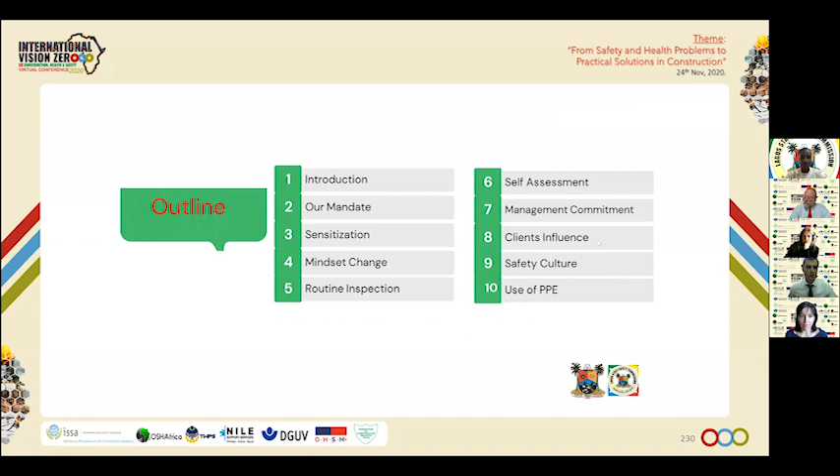Before I start, I'd like to give a brief introduction about the mandate of the Lagos State Safety Commission. The Commission was established in 2011 and has the mandate of being the policy formulating, advisory, and regulatory body for all matters relating to the safety of lives and properties. The Commission is also responsible for coordinating government ministries, departments, and parastatals, and as part of our core functions, we conduct investigations and make recommendations on policies relating to safety in the state.

What is our mandate? According to Section 9A of the Lagos State Safety Commission's law, part of our mandate includes policy formulation, advisory, and regulatory function for all government MDAs regarding the safety of lives and properties at all levels and all safety-related issues.

In the same law, Section 10E empowers the Commission to promote safety culture through sustained public and institutional enlightenment strategies and programs, which we carry out through a series of sensitization and advocacy initiatives.

So I'm going to start with sensitization. What do we mean by sensitization? The Lagos State Safety Commission has, over the years, made it its responsibility to bring safety awareness to artisans, builders, contractors, ensuring that every individual understands the part they play in ensuring the safety of lives and properties at work.

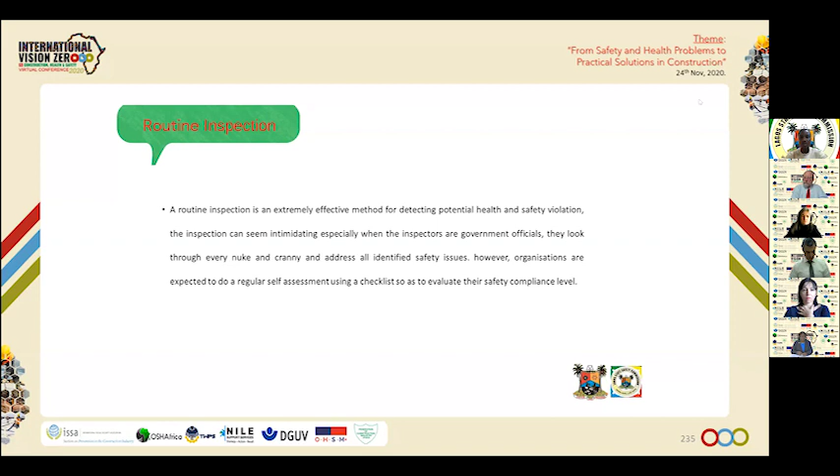This is one of the functions of the commission, and part of what we do is ensure that our list of consultants and officials go around various construction sites with pre-established checklists, ensuring compliance with certain safety measures to reduce accidents across construction sites in Lagos.

Self-assessment. The purpose of self-assessment is to promote and improve safety performance through the direct involvement of personnel in critical examination and improvement of their own work activities.

Our opinion is that it is important. Self-assessment is an important mechanism to ensure that management is effective in monitoring operational safety performance, and it takes time to ensure corrective actions are put in place to improve performance in their respective organizations.

Some of the advantages of self-assessment include recognizing and controlling hazards in your workplace, reducing accidents in the workplace, and reducing costs by being proactive instead of reactive.

We'll also be talking about management commitments, and this is another area where we see a lot of construction sites and contractors lacking, especially in Lagos.

Management commitment cannot be overemphasized. It is a specific and critical component to ensure the safety of workers, and that there's awareness in itself. It has a lot of benefits.

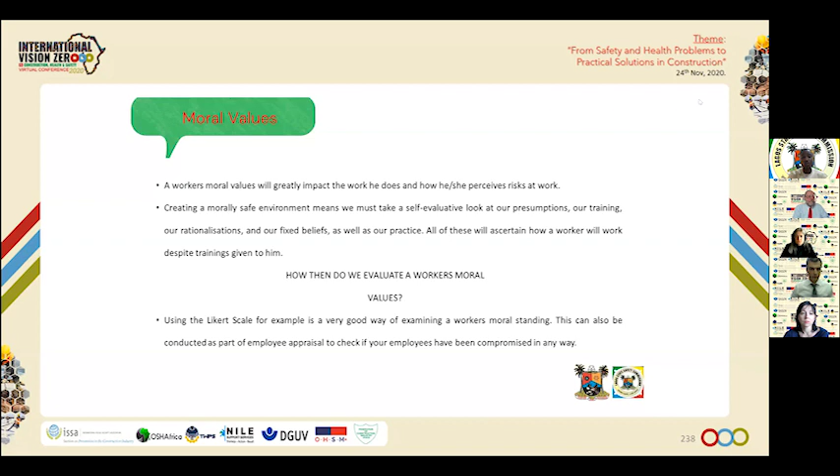This is important because a lot of artisans have various moral values. And until we analyze where these moral values lie alongside our organization's commitment to safety, there will always be a gap between establishing a proper safety protocol on our sites and enforcing it across the various sites.

A positive safety culture. A safety culture is an organizational culture that places a high level of importance on safety beliefs, values, and attitude. A positive safety culture can result in improved workplace health and safety and organizational performance.

The best way to enshrine a positive safety culture is, one, ask questions. Do workers know all the safety procedures and believe that they are important and necessary? Are workers, managers, and senior leaders willing to invest the needed time, money, or energy into achieving company safety objectives? Can workers, managers, and senior leaders freely communicate their concerns without fear? Do leaders have the time to educate, train, motivate, clarify, and remind workers on the company's safety goals?

Are your safety and productivity goals mutually beneficial? All these questions are important to ask for us to start establishing a positive safety culture.

Now, use of PPE. The use of PPE, as we all agree, is the last control measure and is a very crucial aspect in construction sites. PPE protects users against certain hazards, and this must never be overlooked. At major construction sites in the state, there has been an oversight on the use of PPEs, mainly because there are many independent construction workers and they may be difficult to supervise.

Greetings of the hour, everyone. I'm really humbled to be in the lineup with all the distinguished speakers for the 2020 International Vision Zero Conference. I'm Jackie Lwanga, and I'm the HSE manager for the East African Crude Oil Pipeline on the Ugandan side of the pipeline. I'd like to share some of the cultural challenges we face in the construction sector.

First and foremost, before you even think of the risks that come with the construction itself, I'd like us to go a step back and look at the risks we face at the time of clearing the site, ready for construction. My question to you is, what is on the site? What will you find on the land where you'd like to develop? You might find some ritual places or shrines, you might find graves. What is the legal framework when it comes to relocating these items? What are the cultural norms? What methodology do we use in the relocation? How do we manage the risks introduced by these processes, and what general considerations should you take into account?

So this is you with your big project about to start, and this is the site you've been allocated, and you find a shrine. It might be for a family, a clan, or a community, so moving it is not as simple as it may seem. It might look like you're out in the wilderness in a bush and you find a tree, but it's a tree of blessings where people go to conceive twins, get married, get finances, get all sorts of blessings. This could belong to a community, a tribe, a family, or a certain region. You don't just cut it and start your construction. There are guidelines you must follow, which introduce risks into our projects.

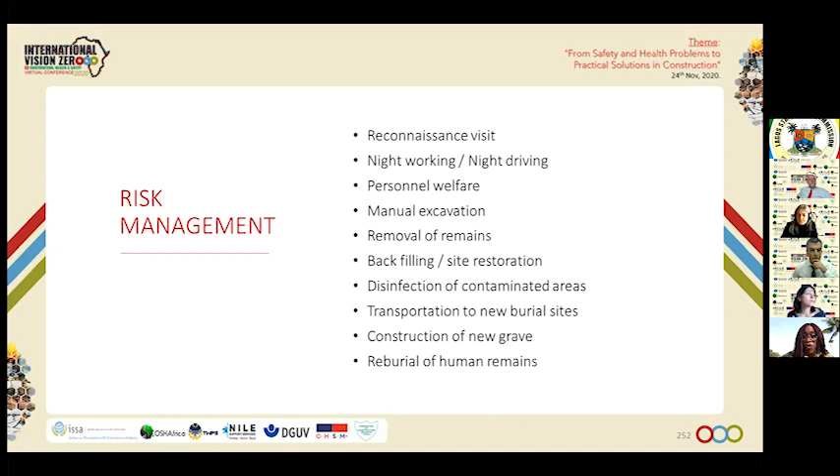So all these you've got to take into consideration. So your risk assessment before you go into the construction risk assessment should consider you relocating all these items that you may find on your site.

So what are some of the general considerations that you should have in mind? Take into consideration logistics - what equipment, what vehicles, what PPE do you need for these activities?

Many times you're not able even to complete one grave in one night. So how will you store the tools at the end of the working day? How will you disinfect the tools prior to storage? What chemicals will you use? Looking at the whole activities, your emergency plan...

Taking into consideration everything else that is happening, has to be really thorough, and you've got to practice it to make sure that should it happen, it will actually work for you. These activities normally attract loads of members from the public. How do you screen them from coming to your site and viewing what's going on?

Waste management is another very sensitive area when it comes to these activities. Sometimes they take the soil closest to the body and put it in first, then put the clean soil on top. But you have to check with the National Environment Management Authority to see if they agree with all this that you're doing.

So much as you may have top management commitment and support, identifying hazards in such scenarios - because it varies from one tribe to another, from one country to another - and also controlling the risks really, really varies.

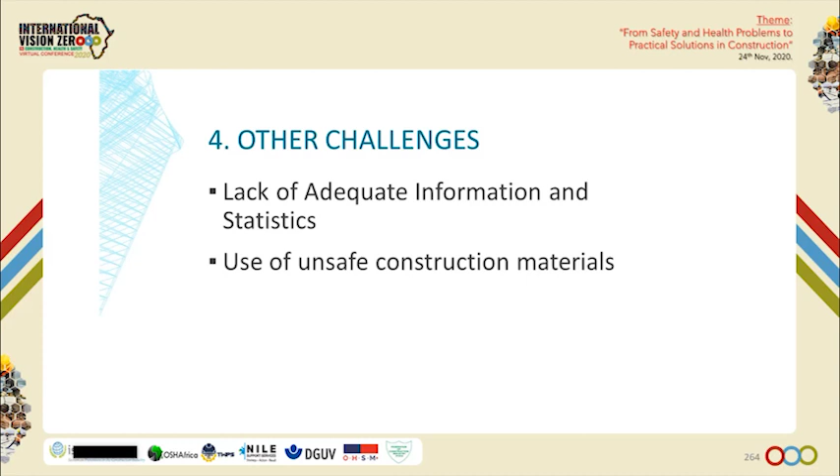Our recommendations, very quickly. We believe that there is need for more and greater advocacy with government. Without advocacy with government, many of these problems that we are seeing with the issue of governance will remain there. Yes, we are aware there are little areas of great work being done, like in Lagos State, but what happens to the rest of Nigeria? There's a lot of advocacy we need to do as a health and safety organization with our country. And there's need to create awareness amongst employers to let them realize that it is much more expensive to work in an unsafe environment compared to a relatively safer environment.

We need to educate our workers, and we must sponsor surveys to generate data. A lack of data remains one of our greatest problems in Nigeria. I thank you very much for listening. I'm sure the questions we posted on the WhatsApp group or on the question and answer group as recommended.

Thank you very much. Thank you so much, Madam. That was very insightful, and we enjoyed every moment we spent with you, and we hear you loud and clear. We heard the issue of unemployment that makes workers work no matter the condition they've been given. That's very loud and clear in your presentation. We heard the issue of data. Data keeps popping up in every presentation. But I think, all said and done, we need to start from where we are, no matter how little it is. The little information that we have in our workplaces on a daily basis, put them together, document them, that becomes data for us. Let's start documenting issues. Thank you so much. That was very, very insightful. We appreciate you. Thank you.

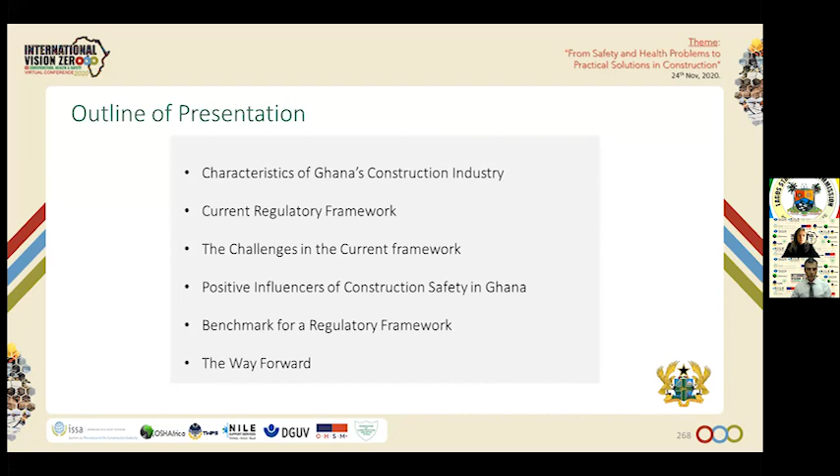I'll also look at the challenges that our current legal framework throws up onto us. Duty holders are not able to comply because there's what I call a legal uncertainty in the current framework. We'll also look at some of the influencers, those helping to drive change within the construction sector. We'll look at the benchmark we are aiming for moving forward and the way forward to getting there.

So without wasting time, this is a snapshot of our construction industry. It can be categorized under three subsectors: commercial and residential buildings, industrial infrastructure, and transport infrastructure. It plays a very significant role in nation building.

As a result, according to the Ghana Statistical Service, the construction sector contributed about 7.1% of GDP, back in 2018. It also employs a significant, reasonable proportion of the young population, according to the labor report published by the Ghana Statistical Service in 2015, which is the most recent data we have. It employs about 4.4% of the working population.

But what's interesting to note is that of this percentage, about 97% work in an informal sector. So the construction industry in Ghana is largely an informal economy. As a result, we have a lot of local artisans playing a role in the sector.

They are confronted with a lot of challenges, including lack of training. Workers within the sector are often trained through apprenticeship programs; beyond that point, there's no formal professional training given to them. According to studies by Diverse Empowerment in 2014, it identified a skill gap of about 60,000, projected to increase to 250,000 in terms of skills. So clearly there's a challenge in the industry.

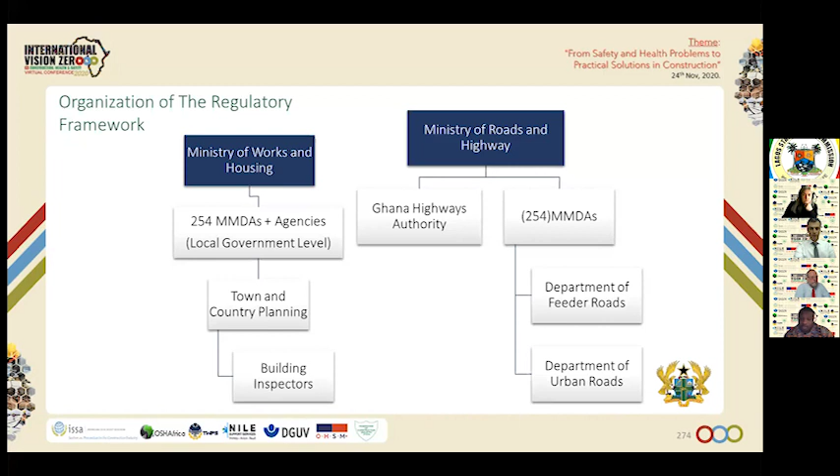With regards to road construction, we have the Ghana Highways Authority. We also have the district assemblies working through specific departments like the Department of Feeder Roads and the urban roads. So at a snapshot, you realize there are a lot of agencies involved when it comes to various health and safety concerns in the industry.

This slide gives a snapshot of how it has been framed. When it comes to fire safety, we have the Ghana National Fire Service. They have a specific regulation enacted into force, and they enforce compliance with that regulation, which is fire precaution. We also have environmental concerns championed by the environmental agency, enacted by an act of parliament enforcing a specific LI.

When it comes to development permits like building permits and any other permit you need to construct a building, that is championed by the Land Use and Spatial Planning Authority. So it goes on like that. These are some of the laws we have as far as construction in Ghana is concerned.

What is interesting to note is that there's no specific regulation on construction safety, unlike other jurisdictions like the UK, where they have a CDM regulation dedicated specifically for construction. We have local governance, land use and spatial planning acts, and these are all sort of decentralizing the role.

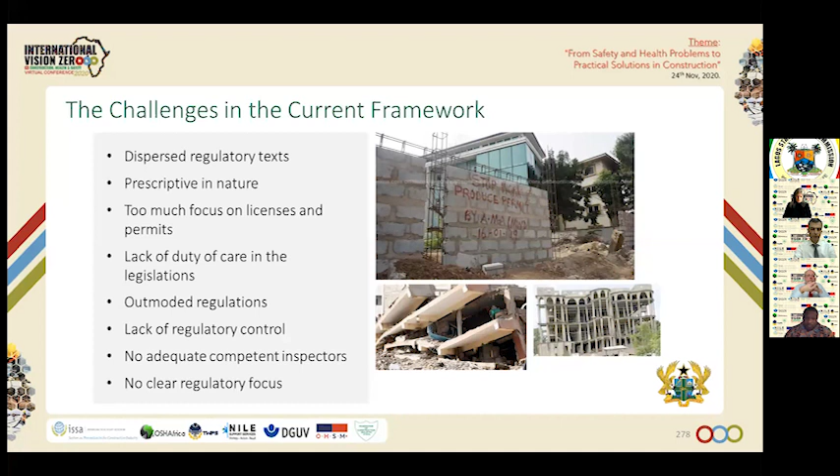So given the poor safety standard that we have and the organization of the legal framework, that makes it very difficult for us to ensure compliance.

We have certain external influences helping to bring about change. For example, the IFC performance standards, championed by the World Bank in collaboration with other financial institutions, provide donor support to most of the foreign multinationals embarking on construction projects in Ghana. You realize they are able to follow through with the EHS guideline of the IFC. This is quite common with foreign multinationals, especially in the oil and gas sector. On major onshore projects, you have the clients ensuring the use of the EHS guideline.

This is helping to drive change within the industry in terms of supply chain control, because once they are giving out contracts to subcontractors, they integrate EHS requirements in the contract, and they're able to influence down the supply chain what all the players in the construction project have to do. We also have the role of the media in a somewhat reactive approach, because they bring to the forefront what the incidents are.

Especially with the recent collapse of the building, it was the media that brought this to the attention of everybody, and this is sensitizing a lot of awareness and getting the pressure groups involved to continue to push for a reform in the industry. So definitely we have a benchmark that we are looking at.

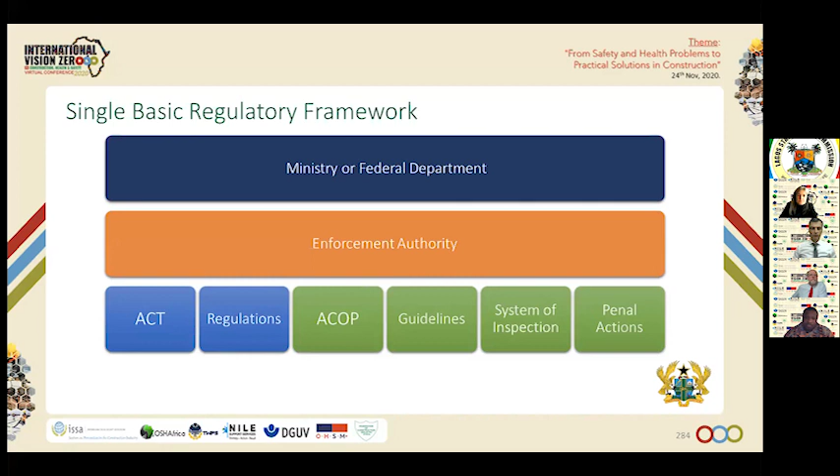Thanks. So for us in Ghana, we are looking at a single framework. We want to make sure that all the dispersed regulations are harmonized. We want to make sure that the regulations cover all health and safety risks. We also want to make sure that we follow the goal-setting principle, where we set regulations and expect that they follow best practice, and that resources are allocated to the various enforcement agencies.

If it's good for us, we will also have a system of data collection and analysis to bring about improvements in the sector. So before I end this presentation, I'll leave you with a quote from Todd Conklin, which states that safety is not the absence of accidents, but the presence of capacity. We need capacity in our national systems, our management systems, and our employees.

That's the end of my presentation. I'll stand by for any questions. Thank you.

Thank you so much, Selam. Thank you so much for a paper well put together. You agree with me that that was brilliant also. Thank you, that was really novel.

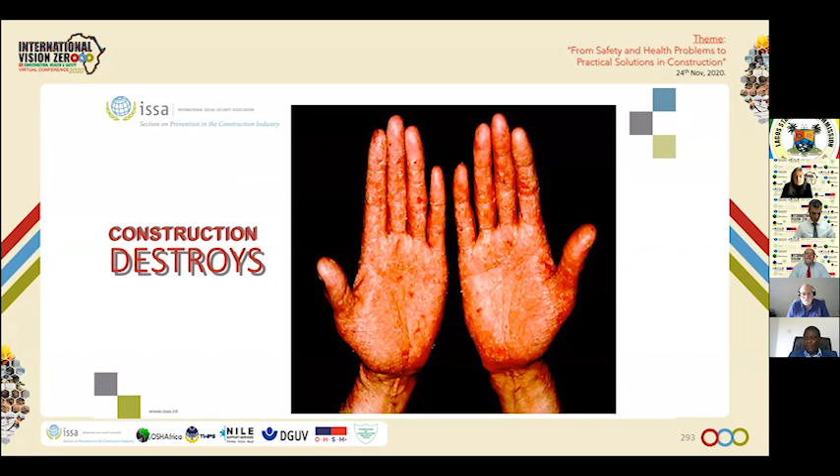Thank you very much for giving the opportunity to talk about fall protection measures in line with Vision Zero in construction. First of all, I would like to say construction is beautiful. I'm a civil engineer, so this is my first slide always. Construction is beautiful, I love construction, but construction destroys as well, and construction can hurt, and it could be fatal as well.

We heard a lot of facts today from different countries and from all over the world. I only want to highlight two facts. One is every 14 seconds, someone dies due to work conditions in this world. And fatal injuries due to falls are approximately 20% of all fatal injuries worldwide. This is a huge amount. If we talk about financial loss, the economic loss worldwide is 0.5% of GDP, that means 0.25 trillion US dollars related to fatal injuries from falls. This is something you should keep in mind all the time.

What are the general causes? We heard it this morning. If you look at accident causes in construction, these are the main accident causes, and slip, trip, and falls is number one. Ladders are also related to falls. We heard it again this morning.

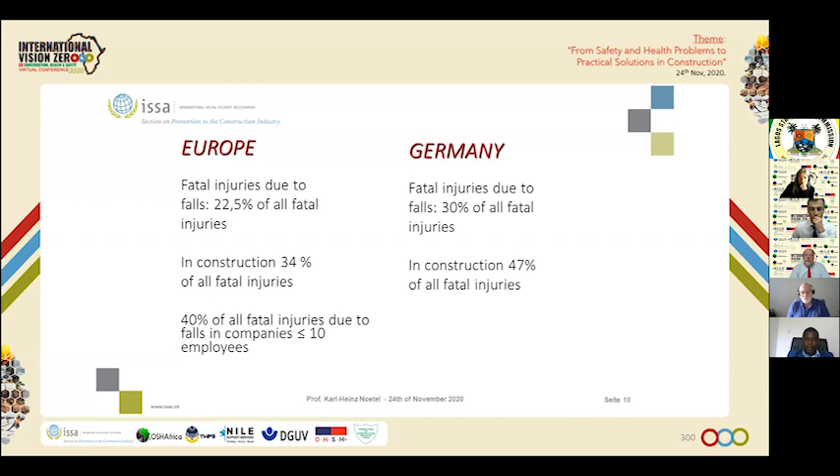Sorry, Professor Karl-Heinz, sorry, I have to interrupt you. You seem to be too far from your system, so people are finding it difficult to hear. Yes. Better now? That's better now. Thank you so much.

So, fatal accidents at unsecured stairs. As Ms. Stolofta already mentioned this morning, we still have this situation all over the world, and a lot of fatalities only because of that. We have a lot of technically excellent solutions for this, but we have to actually implement them.

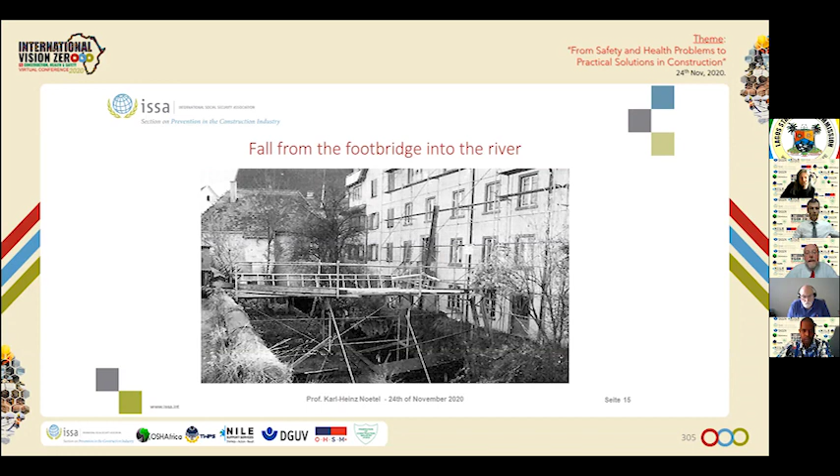There are devices available inside the building to use as an anchor point for your personal protective equipment. Or if you have a large cleaning job on a facade, you can use facade scaffolds.

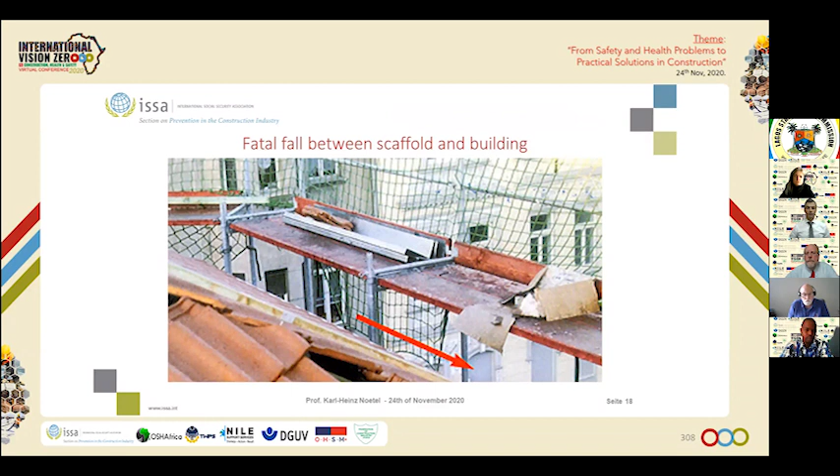Here, a fatal fall between scaffold and building. Seeing it from here, it looks quite good, but seeing it from the ground, you see the problem - it was a big gap between the scaffold and the building. Or another fatal fall between the building and the scaffold: here you have a facade scaffold, but the distance between the building and the scaffold is too much. It should be not more than 30 centimeters. Here we had a fatality as well.

So we have to ask ourselves, why do we tend to repeat some of our mistakes from the past, or similar ones? You heard this morning from Paul Defil that the first regulation to prevent falls is more than 2,500 years old - it was in the fifth book of Moses in the Bible. We have a lot of religions in this world, and if you really look at the holy books, you will find in nearly all of them some requirements. So we've been talking about it for thousands of years, but nothing changed, or let's say nearly nothing changed. We still have this huge amount of falls and fatalities related to falls.

For me, one of the main reasons is we have no safety culture. We have countries where safety culture is an issue - for example, the northern states in Europe have a good safety culture, and other states are working on it, but we have to look at this. Then we have to ask ourselves, are we using the right methods to change this situation? I have to say we have a good method, and it's called Vision Zero. And remember, the fatality rate in construction is around 2.5 times higher than in other industries.

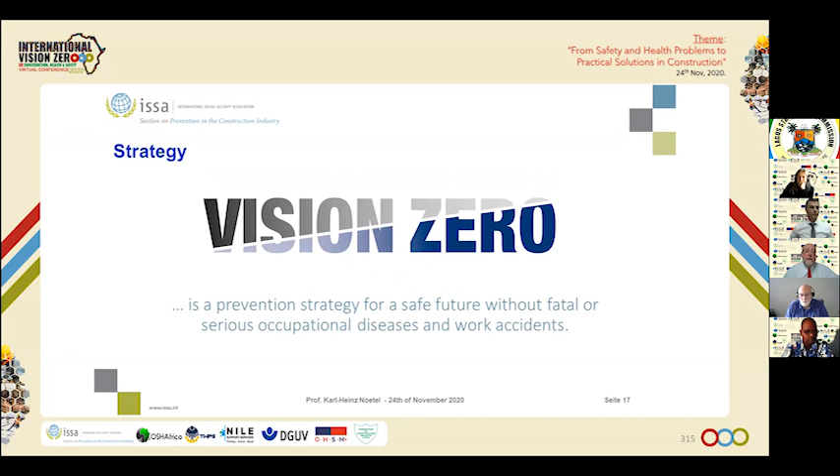For me, it's already a movement in this world because more than 100 states in this world are working on that, and every month it's getting more and more states following this idea, Vision Zero, this movement. And this is a prevention strategy for a safe future without fatal or serious occupational diseases and work accidents.

And we heard it this morning, illusion or mission possible. For me and for the lady this morning, yes, it is possible. Yes, we can do. You know that sentence from USA.

We have the 7 golden rules, and I don't want to repeat the rules in detail, but I want to show you how can we implement fall protection measures in these 7 golden rules. So the first one, take leadership commitment.

Paul said this morning, on every agenda, first item should be safety and health. And please believe me, I know some companies doing it, a lot of companies doing it. Only this, it costs you nothing. But if you put safety and health always on the first item on every agenda, I want to highlight it, every agenda, you will see everything will change in your company.

And for example, set an example in respect to occupational safety and health. Maybe you will talk to your managers and to your staff: this year, we want to have 50% less falls. So then you should discuss how can we do it. It is a leadership commitment to work on that and to put pressure on the managers, especially the managers.

Instantly react to unsafe conditions and behavior. Don't say, oh, the ladder is maybe a little bit too short, or it's not the correct ladder, but continue. No, stop and change. And then people will get the feeling, wow, health and safety is important. Our managers, our leaders, they are taking care of us and they want a change.

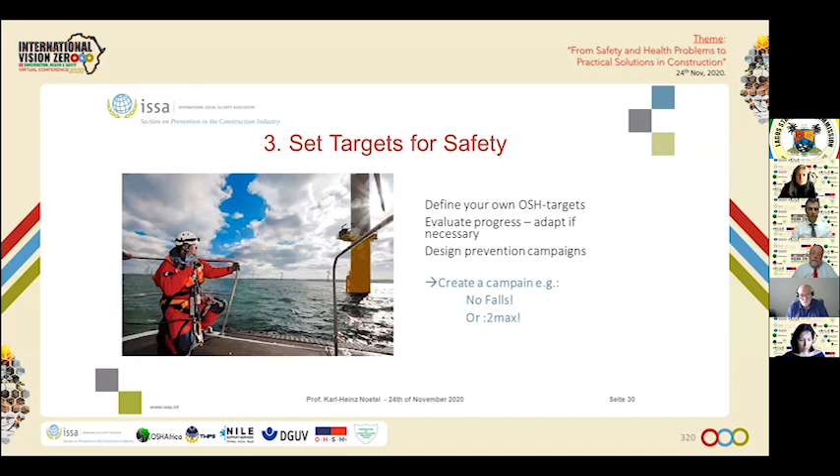Ensure a safe system.

Make your managers responsible. Here I'm saying any severe incident should immediately be personally reported to the CEO. In this time, it would be online; in future, maybe personally, direct. I know a construction company in Belgium that started this some years ago. The CEO said every fatal accident, every fall, or every severe accident, the manager has to come to me immediately. This clear message changed a lot, because now the managers felt responsible. They have to come to the CEO and argue why it happened and who is responsible. So this could be one part of it.

Implement a safety management system. Big companies already have management systems, and small ones have also started to create them. Implement clear safety measures to prevent slip, trip, and falls. There are technical solutions, a routine for how to evaluate the risk, how to manage the solution to prevent the risk, and so on.

The last one here is encouraging owner-client involvement, a very, very difficult issue. Try to convince the owner and the client that any slip, trip, and fall accident will extend the time for the construction phase. If there is a severe accident or a fatality, the construction will stop, because enforcement organizations will come, state representatives will come, maybe police and so on. So it is a stop for the construction site. Therefore, to prevent this, they should support any additional safety measure.

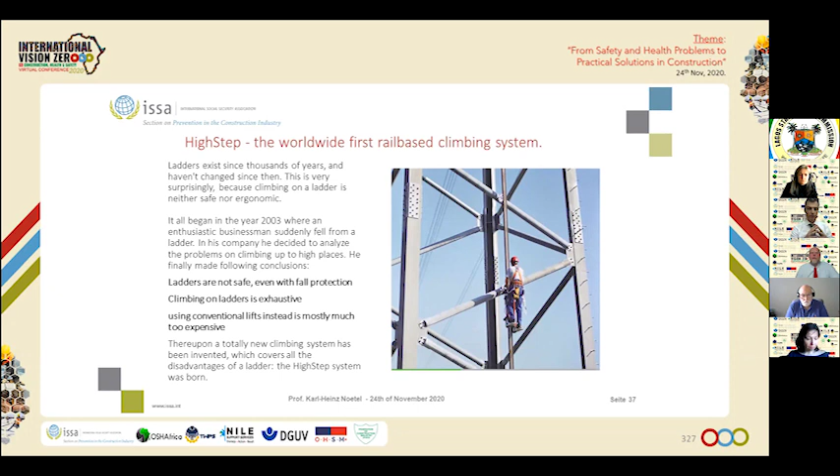A few innovations to show you. High Step, the worldwide first rail-based climbing system. This was invented by a guy who used ladders, but then realized ladders are not safe. Even with fall protection, climbing on ladders is exhausting. Using conventional lifts instead is mostly much too expensive. So he invented this climbing system, which covers all the disadvantages of a ladder. The High Step system was born. If you want more information about it, you can search online for the High Step system.

Or here, very simple, covering previous skylights. Very often we have these accidents. You make this kind of bridge made of steel, which is simple to do, and you are protected for inspections or other things you have to do there.

Or a fall arrest system for scaffold works. We have this developed in Europe, and there are many, many other systems. You saw it this morning also in the presentation of Mrs. Stolofta. But we have to take care of these erectors of scaffolds, because you can't build a scaffold to secure the scaffold workers. So we have a lot of technical devices to do it.

One thing: we have many, many languages all over the world, and I said it this morning in the inauguration. We need pictures without language, and therefore we make drawings of bad examples next to good ones. No written language, so it can be used worldwide. It is open source, everyone can use it. And we have 43 scenarios in the construction section.

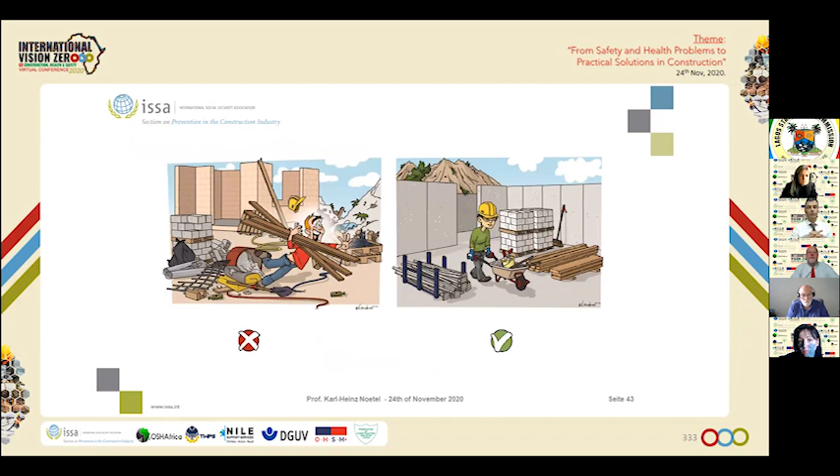I will give you some examples for slip, trip, and falls. Left side, wrong. Right side, right. A wonderful picture we saw this morning from Mrs. Stolofta, it was the same situation in real life. Here, we don't need any explanation, everyone can understand. Apologies, Professor.

Just a minute to go. Yeah, okay, I will speed up.

So here you have good and bad. I think everyone can understand.

You can use it also in your brochures, in the construction, in your company. This is prevention through pictures. Go to the ILO website or to the website of ISSA Construction, you will find it.

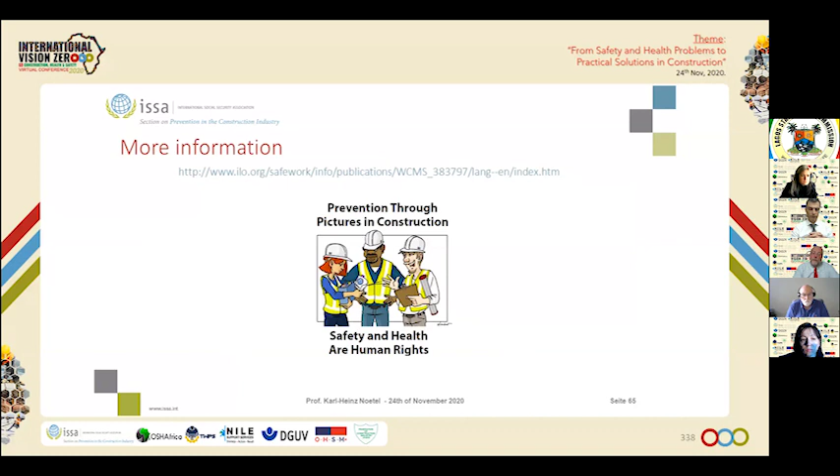Normally this is fatal, but the person survived, and he gave me the right to show it and to motivate people. We are not talking about theory, we are talking about practice. It happened. Therefore, I hope it is a kick-off for you to think more about preventing falls, maybe to change systems in your company. I would like to say thank you for your attention, and I hope I could give you some motivation. Thank you very much.

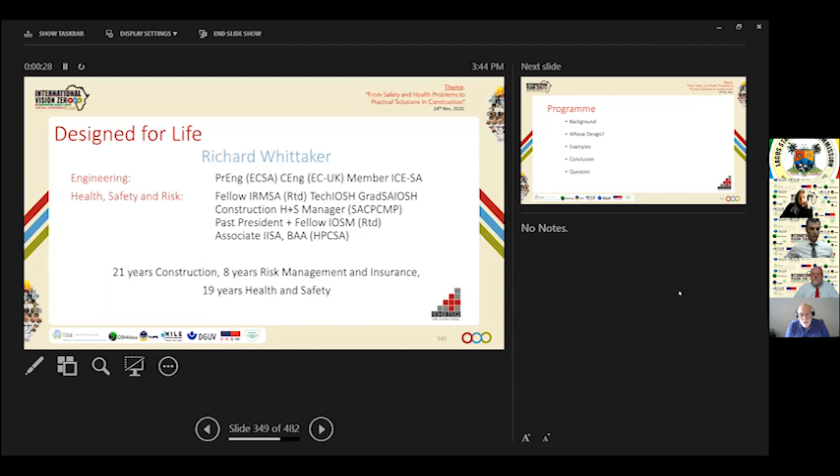Some time ago, as you can see from my front slide, I moved from construction as a civil engineer into health and safety, and it's become something very close to my heart, I must admit. I'd like to talk about the background, particularly in South Africa, to the issue around safe design, then talk about whose design it is, give you some examples of what we had recently in South Africa. After conclusion I will have one question for you, so please pay attention, there'll be points awarded.

Prior to 2003, there was no legislation specific to construction works, but we did have the building works within the general safety regulations. That had 12 regulations that covered issues that could be considered those of construction. When the construction regulations eventually came out, there were 28 different regulations, so obviously a much more focused document.

So the whole background to this is that there have been numerous incidents of structural failure of both permanent and temporary works, and people tend to overlook temporary works quite a bit, as we'll see in my presentation. These led to avoidable deaths and injuries, and it was all triggered by what I like to call the final straw.

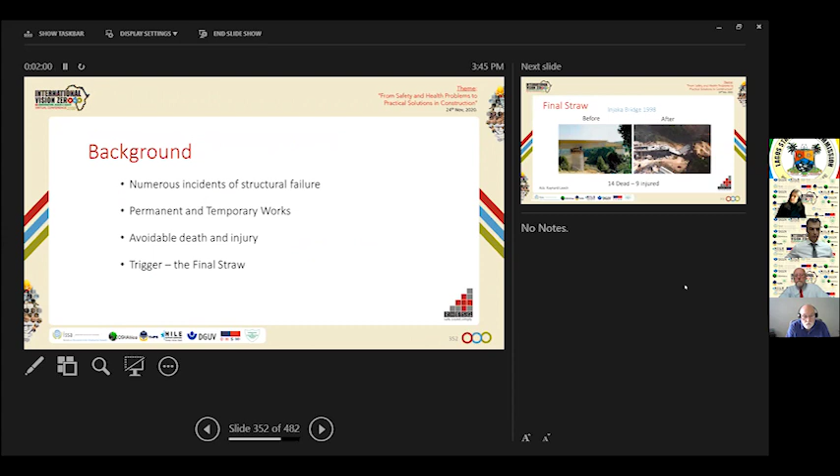In 1998, the Injaka Bridge was being built using incremental launching. For those who don't know what that is, the piece of bridge that would normally span between two columns is built on solid ground and then jacked out over the bearings of the columns. There's a leading edge, and you can see a steel structure in front which picks up the landing on the next column.

Something went wrong, and among the issues were insufficient reinforcement, incorrect placing of bearings, and incorrect interpretation of problems that arose. As you can see, the last straw was that it broke the bridge's back, and we killed 14 people there, with 9 injured.

The investigation went on for a long time, and it was 2002 before the results came out. The inspector of labour pointed his finger at the consulting engineers, who didn't have any independent design reviews for the contract. The appointed bridge engineer had insufficient experience in incrementally launched bridges, and that engineer died during the accident.

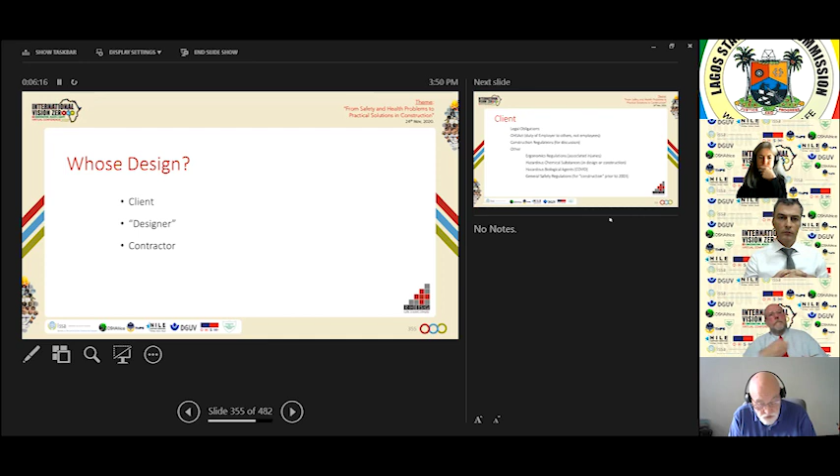And do they consider the health and safety specification? And then, is it built in terms of the drawing or the specification, or is our material substandard, left out?

And then of course we must look at temporary works, which are the contractor's responsibility. And even not just in construction, but also in demolition, we need some sort of designer's input as well.

So in terms of the client who has legal obligations in view of the OHS Act, with a duty of the employer to others, not necessarily employees, and the construction regulations, which I'm going to discuss shortly, there are other obligations too. The ergonomic regulations look at associated injuries with building and or maintaining the structure.

Hazardous chemical substances being used in the design and the material design or in construction. The hazardous biological agents, and right now COVID's in the forefront of our minds. And then the general safety regulations, which, as I said, were used for construction prior to 2003.

So looking at those responsibilities of the client in a little bit more detail, I'm not going to go through them one by one, but there is quite a comprehensive list of duties. Perhaps you should look at equating them to those required by legislation in your mother countries.

One has to ask, are clients aware of these responsibilities? Or do they just ignore them? They could not know about them out of innocence, but they could know about them and just ignore them.

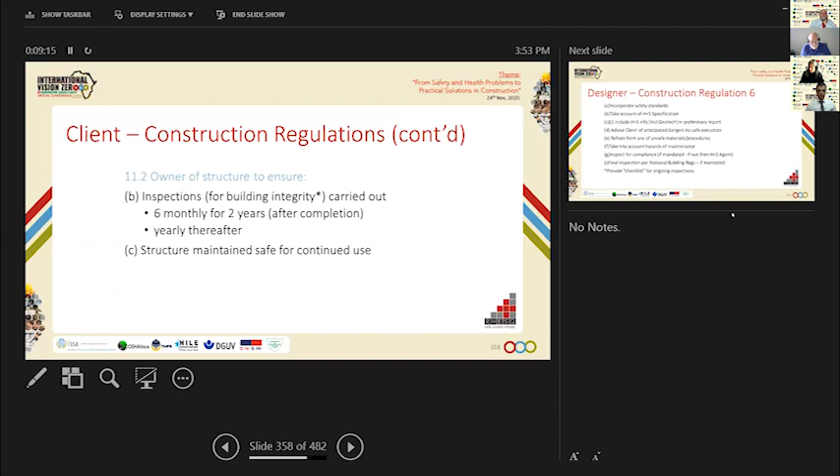Whenever it was built, it should have a yearly inspection, and the client must ensure the building is maintained safe for continued use. The designer has a long list of duties, and if the client hasn't produced a health and safety specification, why isn't the designer asking for it so he can do his duties?

The designer must incorporate safety standards listed in the OHS Act and regulations. This must include health and safety info such as geotech data, advise the client of anticipated dangers for safe execution of the works, and take into account hazards of maintenance.

At the end of the job, it should be inspected for compliance by the designer, and if the designer isn't mandated for that, the health and safety agent appointed by the client should do that work. There should be a final inspection as required by national building regulations. The designer should provide a checklist for ongoing inspections at 6 monthly and yearly intervals - otherwise how will the client know what to inspect?

As far as the contractor is concerned, I'm looking specifically at the temporary works designer. The temporary works design should include all anticipated loads, including those imposed by temporary works, such as reinforcing being stacked in the slab while waiting to fix the next slab up. That temporary works design must be aligned to the structural design drawings.

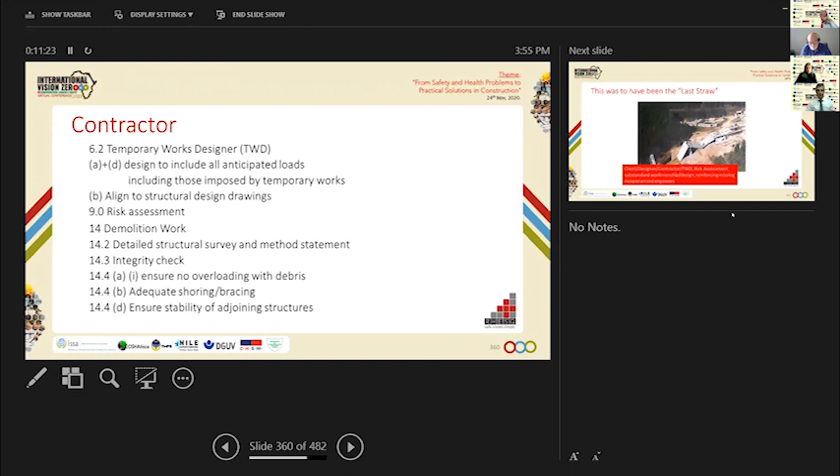The Injaka Bridge was to have been the last straw. In that case we looked at the client, the design, the contractor, temporary works design - risk assessment wasn't there, substandard workmanship or design, reinforcing missing, inexperienced engineers.

The construction regulation of 2003 - I've used that because most of the examples I give relate to prior to 2003 or prior to 2014 when the second one came out. The application is universal for all construction work, and a lot of people miss this: you don't need a health and safety specification under specific conditions.

There doesn't have to be a principal contractor's health and safety plan, nor does the subcontractor need one, where construction work was greater than 50% complete at the 18th of July 2003 when the regulations were promulgated. But all other regulations in the 2003 version were applicable irrespective of construction status.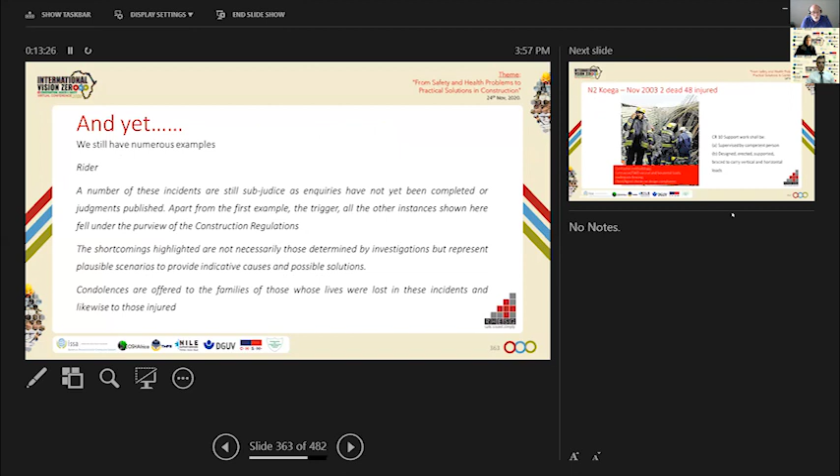On the N2 National Road at Koega, near Port Elizabeth on the south coast of South Africa, this incident happened just 4 months after the 2003 construction regulations were published, which in itself should have provided additional health and safety focus, but alas, not so.

Typically, since this isn't an isolated incident, this would have been caused by concrete dumped in one location and then vibrated to another, creating an initial temporary high point loading and inducing lateral loading on the substructure as the concrete was vibrated across. It could also be that the false work was not designed per se - it could be using standard units assumed to work, and doubtless there was a great shortage of horizontal and diagonal bracing to stop horizontal movement. The combination of these effects caused the whole structure to collapse in this fashion.

So again, it comes down to contractor's methodology, temporary works design, and the client agent checks on design compliance.

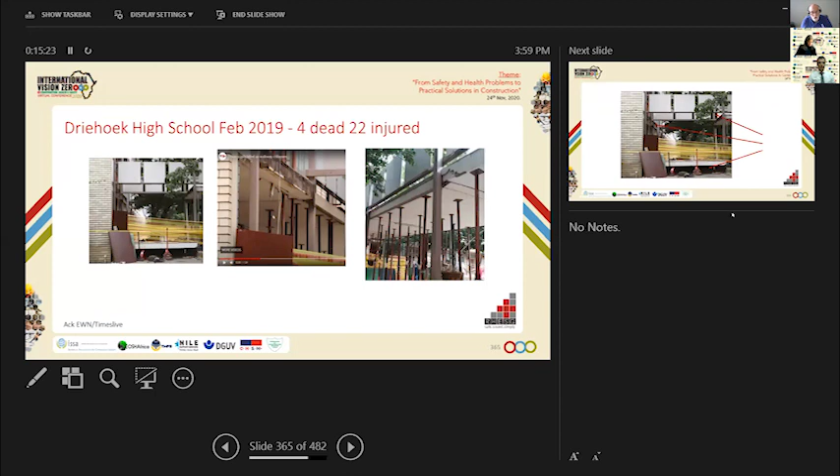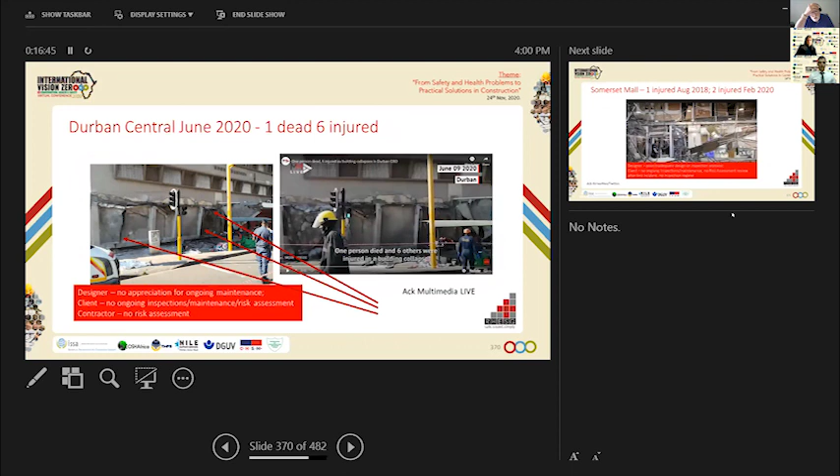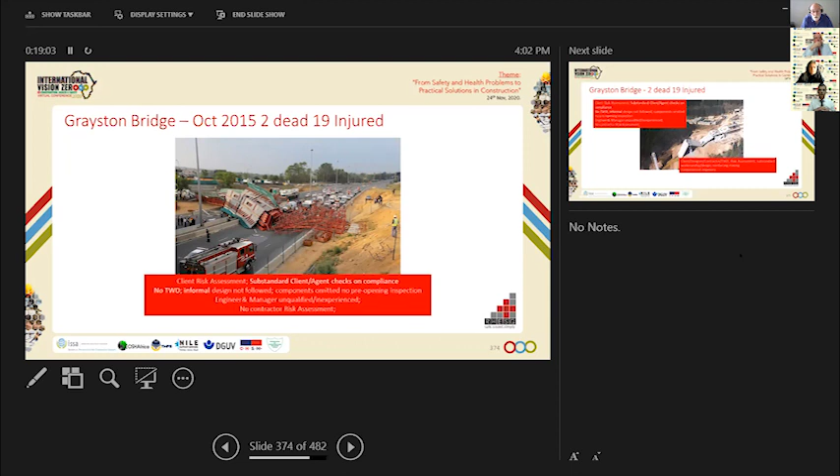There, we're looking at exactly the same thing 20 years previously. Exactly the same problem. The people doing the work weren't doing their work properly, and the people designing it weren't qualified to design it.

So, look at legislation and look at compliance. I looked at enforcement. How do we do it? The legislation is pretty good. It's taken a while to get it right, but it's pretty good. People seem to ignore it. So how do we enforce compliance? And why don't we enforce it?

Again, it's the usual story of safety costs money. Well, I bet those last two jobs cost a lot more than a bit of safety. So we look at just common sense. And as Winston Churchill said, those that fail to learn from history are doomed to repeat it.

When I say designed for life, do I mean the life of the building, or whose life? Thank you.

Thank you very much for the great presentation. It's quite exciting, but I think the key issue brings us to the attention of paying particular attention even to all these past incidences and occurrences that you've mentioned. I like your concluding remark from Winston Churchill that those that fail to learn from history are doomed to repeat it. I think those are strong words as we move within the paradigm of occupational safety and health. All these happenings in the past must be able to guide and direct us as we move into the future, as we continuously improve the practice of occupational safety and health.

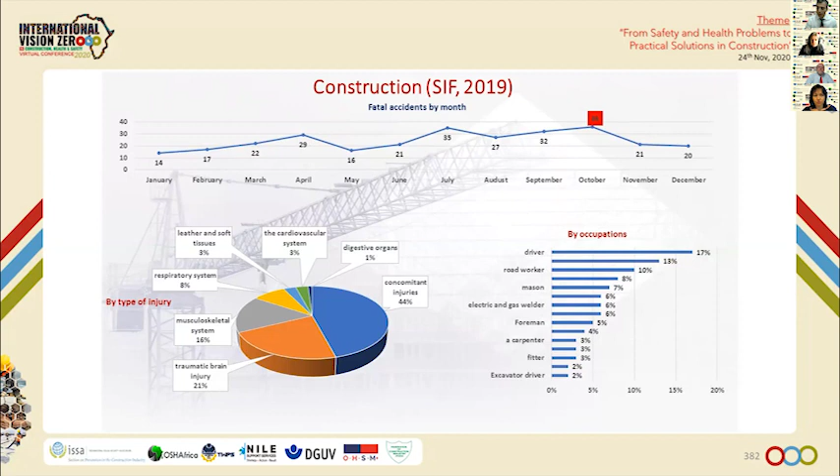A few years ago, we made a research among construction companies. We proposed a tool for running diagnostics of the maturity level of safety culture in a company. We created a list of factors that seem important and divided all the respondents, all the personnel in the construction company, into 4 groups: top managers, supervisors, occupational safety professionals, and workers.

The idea behind that method was to capture differences in respondents' opinions on what factors are more important or less important for creating a culture of safety. The respondents were asked whether a specific factor is important for preventing accidents on a construction site.

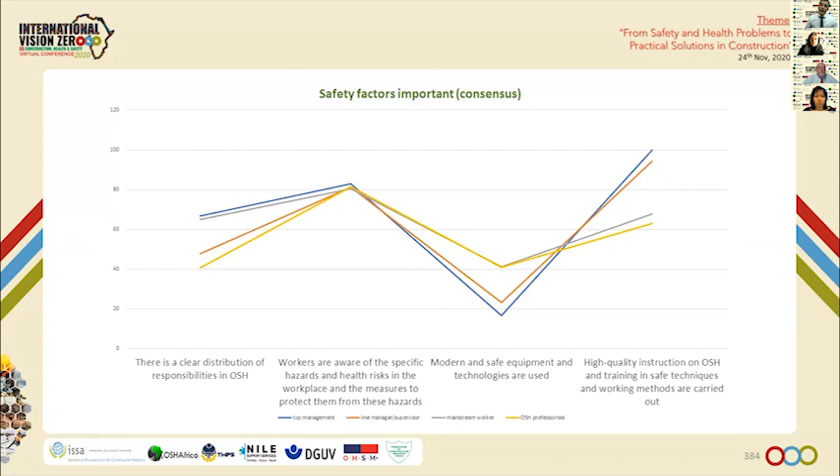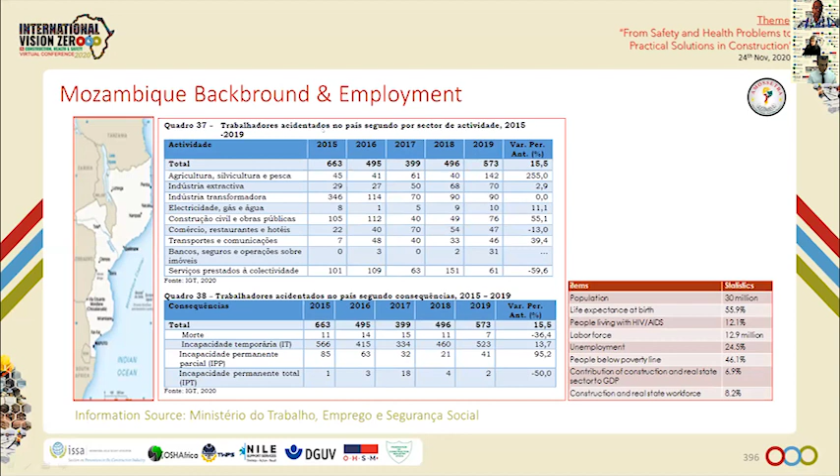And I'm going now to talk about the major construction accidents in Mozambique, which is not different from the other accident types which were presented here. We talk about vehicle and equipment related accidents, fall from height, falling objects, electrocution, being trapped, or in contact with hazardous substances.

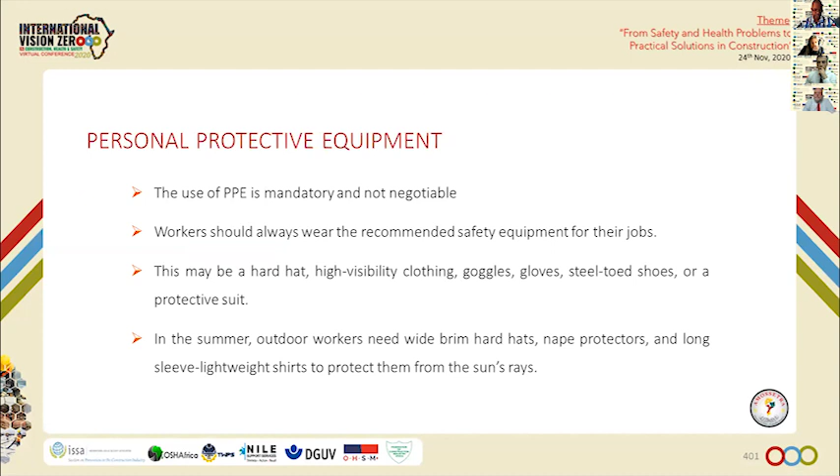I see also housekeeping as one of the prevention methods. If you keep your workplace clean or free from any debris, this can reduce the probability of having injuries. If you don't clean your site or organize your site, there is a chance of having trippings, falls and slips due to these unorganized sites.

So employees should store their equipment and materials when they are finished with the work. Some employees think they have no time, or according to what I've witnessed in Mozambique, supervisors usually do not give time for employees to organize their tools and materials at the end of the work activity. So it's important that employers, in the person of the director or the most senior person in the company, enforce the need of having the site in good working conditions.

Mr. Valeri, our time is up.

Okay, equipment and tool maintenance. Before using any piece of equipment or machinery, workers should ensure that proper working order is in place. So workers should be taught how to use the equipment and how to keep it safe.

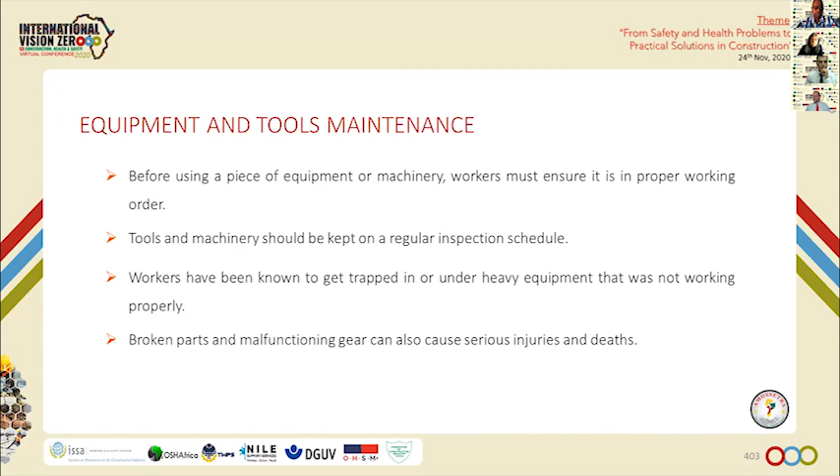Prevention of falls. Most of the accidents in construction, as I said in the graph, is related to falling from heights and also collapsing of scaffolding. So there are two types of accidents that are most killing in Africa. In Mozambique it's also falling from heights, collapsing of scaffolding, and also vehicle-related accidents.

So I will go straight to the commitment of the Mozambican government through occupational health and safety. To show this commitment, Article 8 of the Constitution of Mozambique talks about the obligation of providing good working conditions to employees. The Labor Law, Chapter 6, Articles 216 to 236, also talks about health and safety requirements. The last ratified conventions in Mozambique were the Labor Inspection Convention and the Convention for Safety at Mines.

Although there are over 100 international conventions, Mozambique has ratified only 19 conventions, and this clearly shows that we are still far from having the safety system implemented in Mozambique.

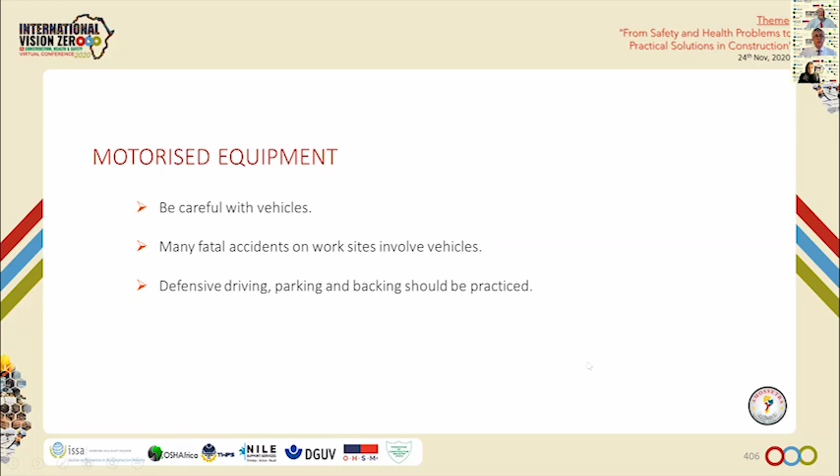Can you see the screen? Yes, you only have to make it bigger. Oh no. Ah yes, yes sir, correct. Yes it's good, not yet, but maybe it takes. Yeah now it's fine, now it's fine. Thank you. But I can't see my presentation. That's not my slide. Machinery and other equipment, no. Ah here I am. You are close to it now. Okay, wait a second, it takes time. Yeah, now it's there. Can you hear me?

Okay, yes, thank you Karl-Heinz for the invite myself. I'm very, with great pleasure to be here on this international conference. Two years ago I was in Africa, in the south, Namibia and Botswana, and I saw the country and I liked it very well. You must hear it from me.

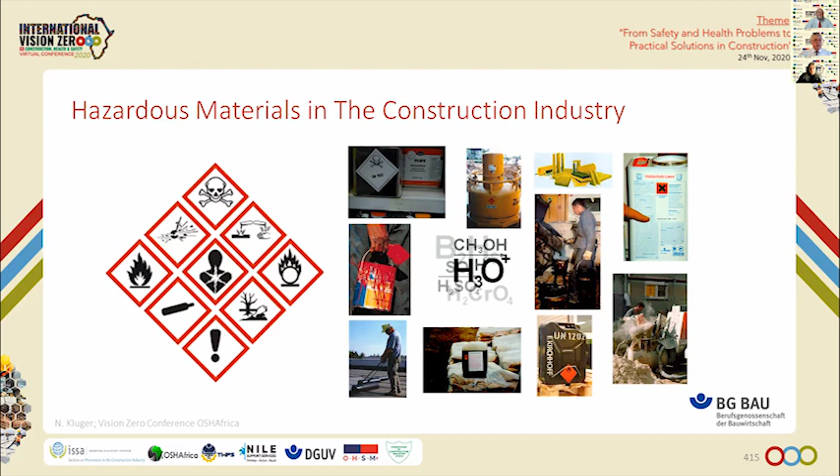It is impossible for me to talk about the field of all hazardous materials in construction. Therefore I have decided to look at the topic from the point of view of hazardous substances yesterday, today, and in the future. I will present this assessment to you using three examples.

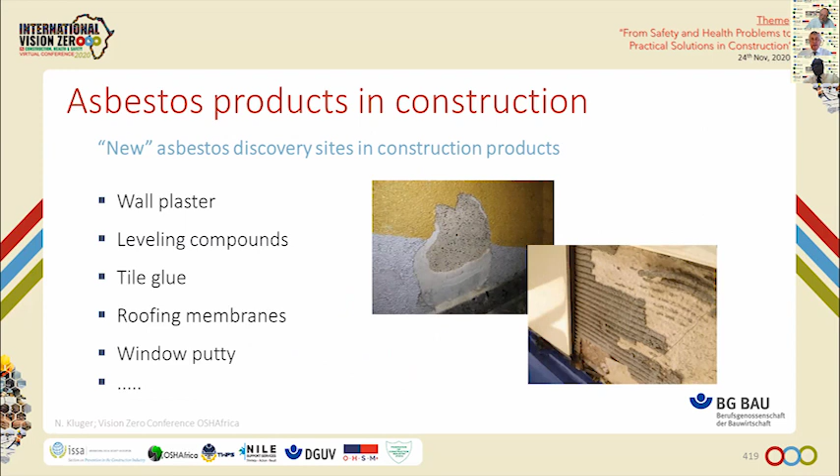So we all have to understand that asbestos is not a thing of the past, neither in Europe nor in the whole world. In some countries, people often work today with asbestos without any protection. Every 5 minutes a person dies in the world from asbestos, and the worst thing is the dying goes on every day. The dreadful effects of asbestos fibers on human bodies have long been known. A ban constitutes the only responsible way to put an end to this effect.

2 million tons of asbestos continue to be produced and put on the market every year. Of nearly 200 countries up until now, only 55 have banned the use of asbestos. So many countries in the world still import asbestos for use in construction. In my mind, without a real worldwide ban of asbestos, there will never be a vision zero. Please keep this in mind.

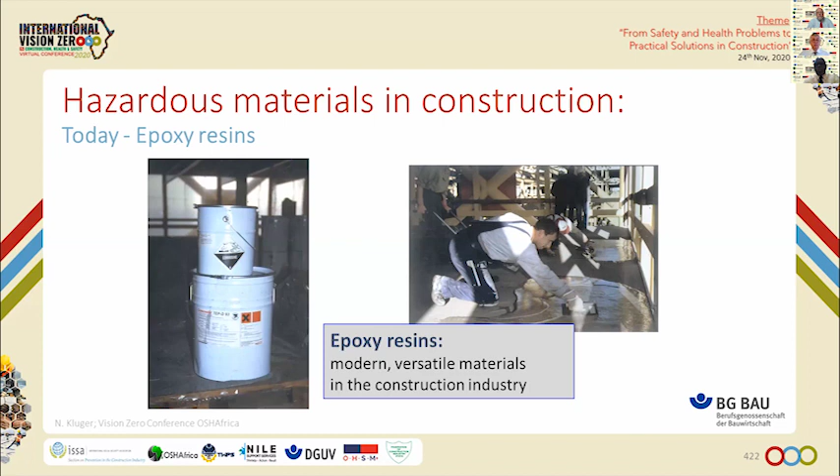Look at today. As you know, the modern construction industry uses chemical products to a large extent, with an increasing tendency. Epoxy resins are such chemical products which are very trendy at the moment. Due to their excellent technical properties, epoxy resin products are used in a wide variety of applications in construction. They're used as two-component systems on site, often mixed in large quantities directly at the construction site. Epoxy resin products have a wide array of uses in the construction industry - for example, industrial floor coating, tile adhesives, primers, adhesives, concrete repair products, and much more.

But the bad side is, if not handled safely, epoxy resin can be harmful to health. Epoxy resins are among the most common causes of occupational allergic contact dermatitis. Direct contact can cause burns or irritation and may lead to allergies. Every year, many employees in the construction industry develop skin allergies as a result of skin contact with uncured epoxy resin. Often these employees are no longer able to work with epoxy resins, and many are forced to give up their jobs. When working with epoxy resins, good skin protection and good skin care are essential.

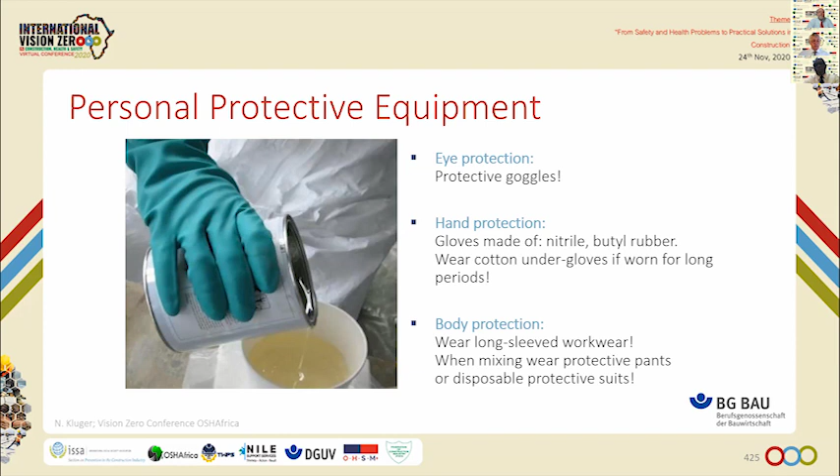It is essential to wear protective clothes and protective gloves. In addition, the skin should be carefully cleaned and cared for. Never use leather gloves - they often offer no protection against these compounds. Never put protective gloves on over dirty or damp hands. Change gloves every shift.

And in addition, you all know about COVID-19. We have new substances in a large range on construction sites.

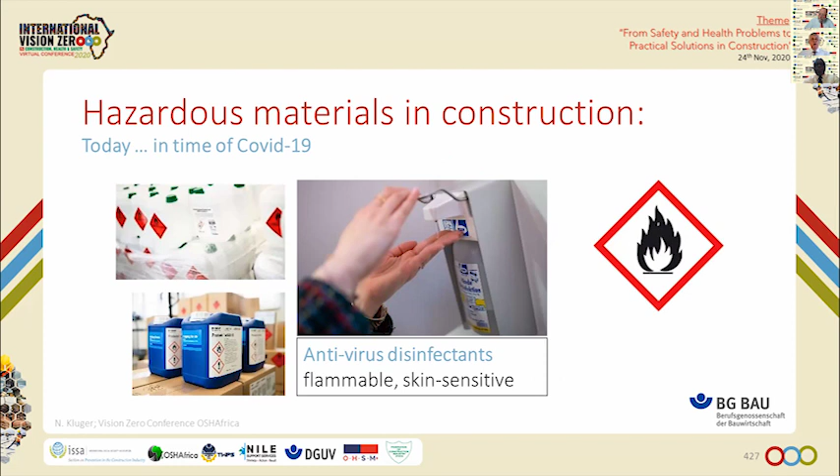What does the future bring? New building materials will be used on construction sites in the next few years. Carbon fiber concrete, for example, is a modern building material that we have to keep an eye on. Carbon fibers in concrete are technically fantastic - you see these pictures, it's wonderful.

Those fibers are more durable than steel and don't corrode. Therefore, it is possible to build smaller and longer-lasting structures. A large number of fiber-based reinforcements of different qualities, designs, and materials are already available on the market. Currently, these materials are mainly used in highly corrosive structures. Overall, however, the market volume of fiber-reinforced concrete is at the moment not very large. For that reason, there are still no specific legal requirements or standards for the use of these materials.

Many bridges built in earlier years are gradually losing stability due to weather and the impact of heavy trucks. They will have to be replaced in the coming years. Carbon concrete could replace the use of steel in construction work - instead of traditional iron rebar, carbon concrete contains carbon fibers.

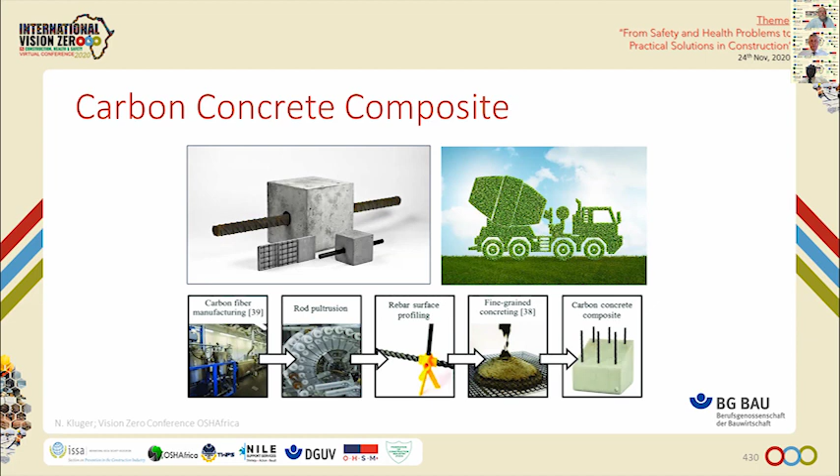Carbon concrete could replace the use of steel in construction work. Instead of traditional iron rods, carbon concrete contains carbon fibers. For approximately 16-fold the price, you get 24-fold the performance. Therefore, carbon fibers already today make more commercial sense than steel.

But what is the disadvantage? You must understand the base of carbon fibers are on one hand PAN-based fibers, or on the other hand, pitch-based carbon fibers. Recent research shows that in processing pitch-based carbon fibers, very small respirable fiber fragments can arise. It is true that pitch-based carbon fibers currently only make up around 5% of the market, but we are very concerned about the release into the air of these respirable critical fibers.

You have heard about the fiber principle. It has been known since 1977 that fibers of a critical dimension, so-called WHO fibers, are able to cause cancer in the lungs. This fiber principle also applies to carbon fibers and other advanced materials.

So we have to be very, very careful when using new materials. We have to carefully examine these products from the point of view of health protection before they are used on a large scale. We must definitively prevent a second disaster like the one with asbestos.

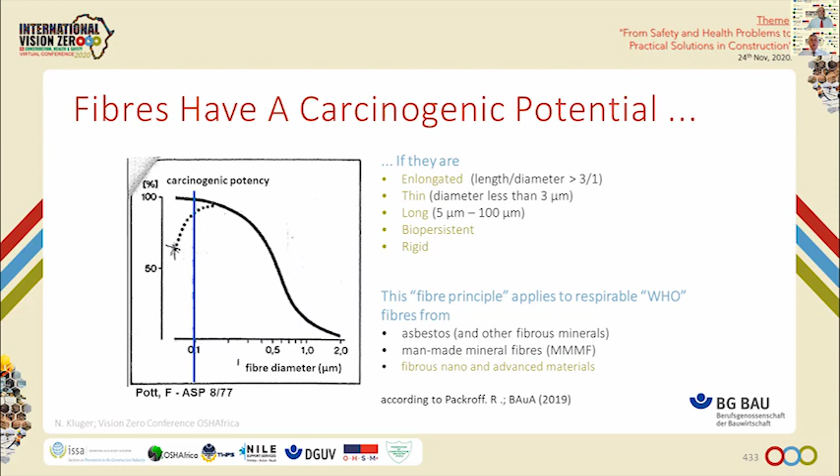There's no question that risk assessment for hazardous materials is a very difficult and demanding task, especially for companies in construction. We know that many companies are hardly able to guarantee the health protection of their employees without outside support.

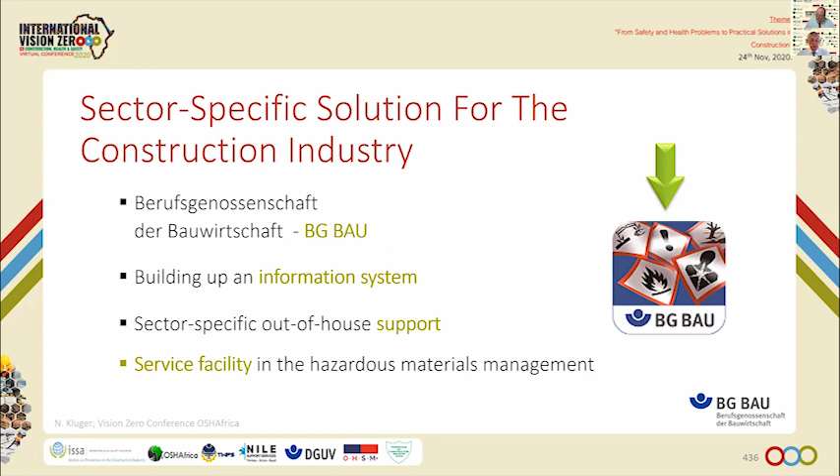Therefore, the BG Bau in Germany set up a hazardous information system a long time ago. The system is designed as a sector-specific solution from specialists for the construction industry and provides information on thousands of hazardous materials. The internet-based system offers extensive support for free, covering many questions on the subject of hazardous materials. Access to information is very simple: over the internet, you enter a search term in the search field, just like people know it from Google.

The core of the information system is short control guidance sheets for the safe handling of hazardous materials. Since employees from many different countries often work in the construction industry, the information has so far been translated into 16 languages. Therefore, the system can also be used well in other countries.

There's also a web-based app for the information system available. So every user who has a smartphone in his pocket can use the information directly on the construction site, exactly when the hazardous substances are being used.

Now I hope I was able to give you a really brief insight into the subject of hazardous materials in construction. The big problems with the use of these substances are the large amount used on construction sites and the lack of knowledge about the danger inside the companies. Without external support from experts like you, it is extremely difficult for companies in the construction area to recognize the dangers and ensure safe use. Therefore, good, understandable information is an important part of achieving Vision Zero. Thank you very much for your attention, and take this message home with you.

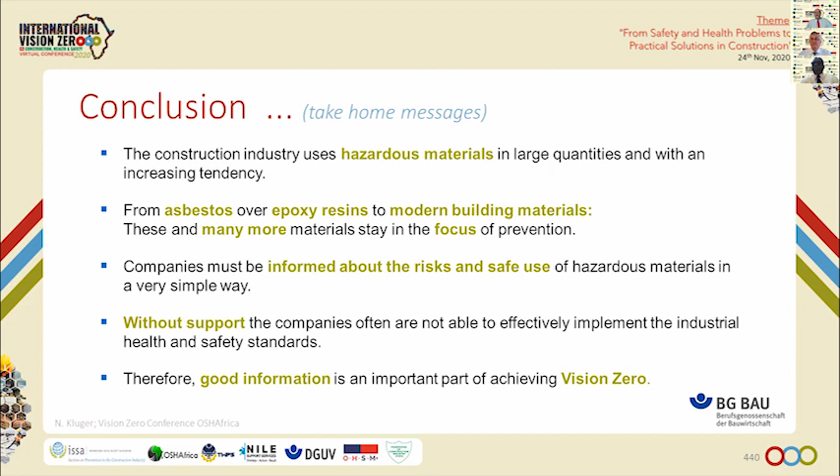Thank you very much. Thank you very much, Norbert, for these interesting, let's say, sector-specific presentations, problems and solutions. And you talked about asbestos, epoxy resins, and a new product with new risks.

So the carbon concrete composite can create a lot of new risks, and we have to take care of that. I was very happy that you mentioned this information system about hazardous substances. It is an open source product and it's available in so many languages. I think it's very helpful for Africa, because if you have a hazardous substance, you will get a lot of information on that system about protection measures and about the risks of the product. And here you can see it again on your mobile phone, on your smartphone. You can use it immediately and all the time.

Thank you very much. I will have a look if there is any direct question. It is not. Nevertheless, I think if questions come, all right, one second, I will share here. No, if questions come later, we are able to forward them to Norbert Kluger, and then you will get an answer for sure. Thank you once again very much. Thank you very much. The next speaker, thank you.

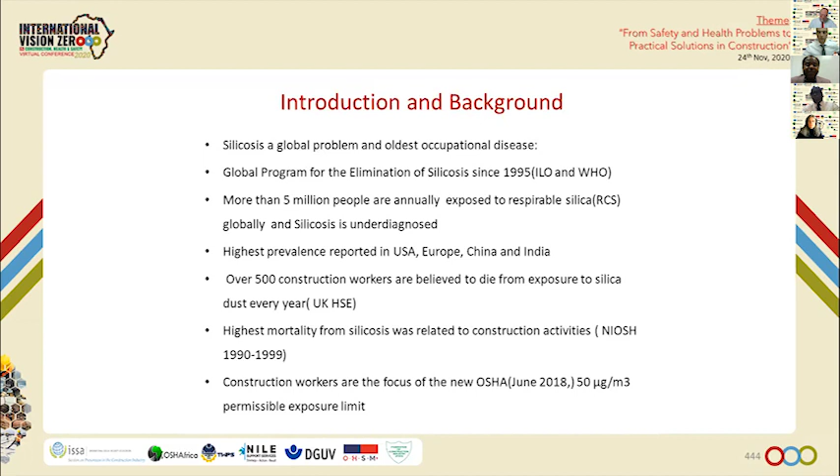I want to give some insight around the causative agent, which is silica, crystalline silica. Crystalline silica, also called silicon dioxide, is a basic component of soil, sand, clay, granite, and other minerals. It is also found in products like brick and concrete, and is the second most abundant element on the earth's crust, second only to oxygen. This explains why it is one of the oldest and most common occupational lung diseases.

The type of silica that causes silicosis is the crystalline type. There's also amorphous silica, which doesn't. There are three types of silica: quartz is the commonest type, also regarded as the most abundant mineral on Earth. The second and third types are cristobalite and tridymite.

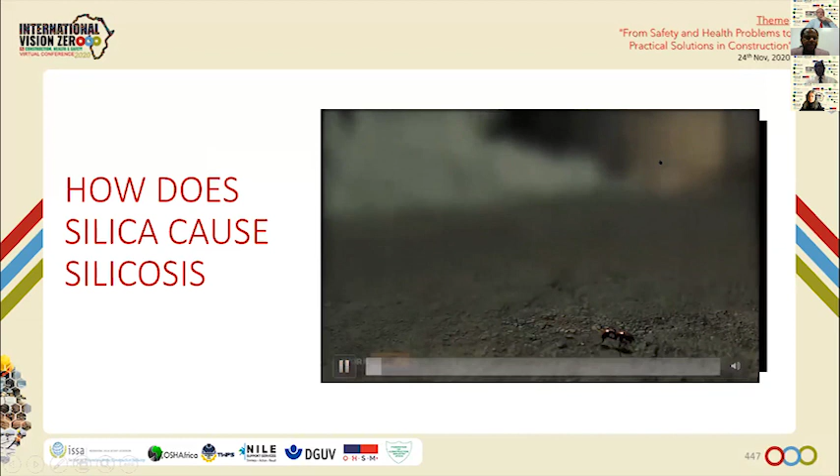Silica. It's one of the most common substances on Earth. It can be found in materials like sand and rock, and building products like concrete and brick.

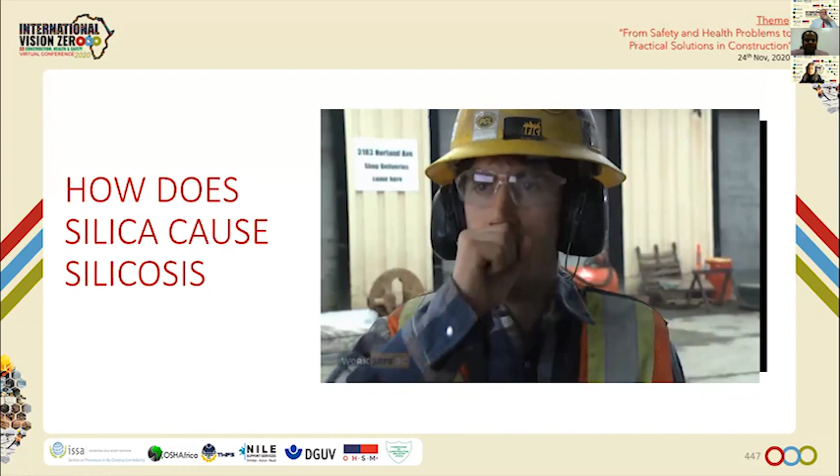When a worker cuts, grinds, or drills materials that contain silica, dangerous crystalline silica dust is released into the air. As the worker breathes, silica crystals flow into his mouth and nose and down the air passages deep into the lungs.

The tiny crystals enter the small, fragile air sacs where oxygen is absorbed into the blood. Immune system cells, called macrophages, engulf and try to dissolve the crystals, but they are unable to. Over time, more and more crystals build up inside the macrophage cells.

The macrophages carry the silica into the walls of the lung, where they die. Scar tissue forms around the dead cells and spreads as more cells die. This damage can continue even after the exposure to silica stops. Eventually, so much scar tissue forms that the lungs can no longer function.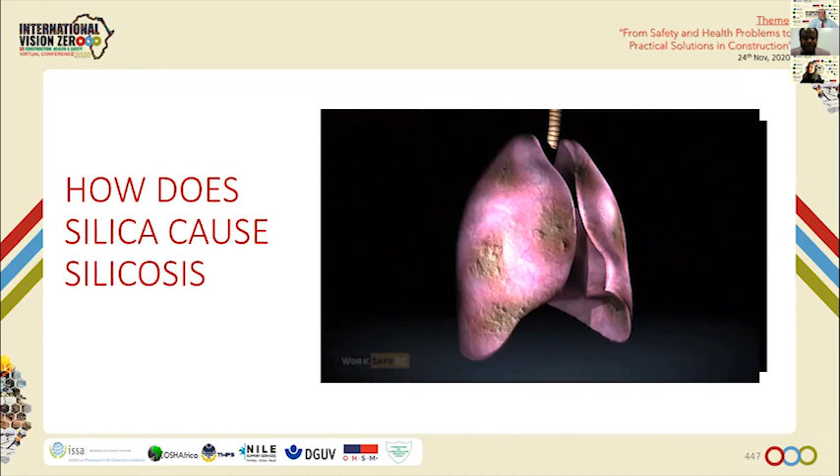For information on how to protect yourself from silica.

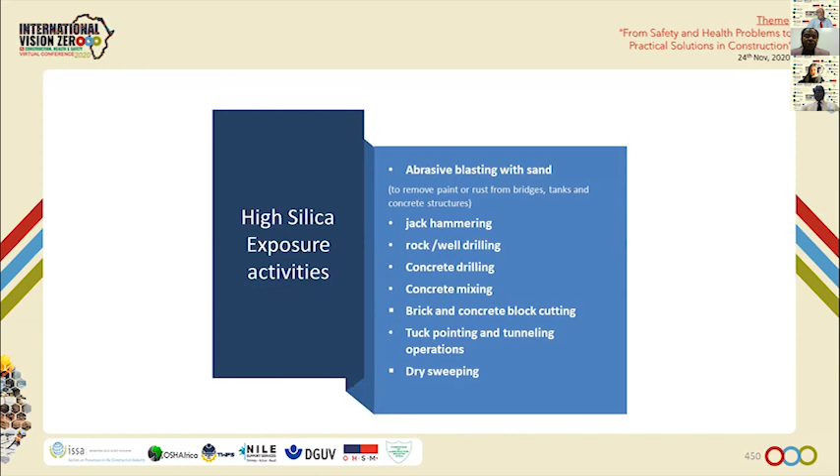Et la troisième, la prévention tertiaire. La maladie est établie. Et l'objectif, c'est de réduire, nous mettre les gens dans un traitement ou dans une réhabilitation.

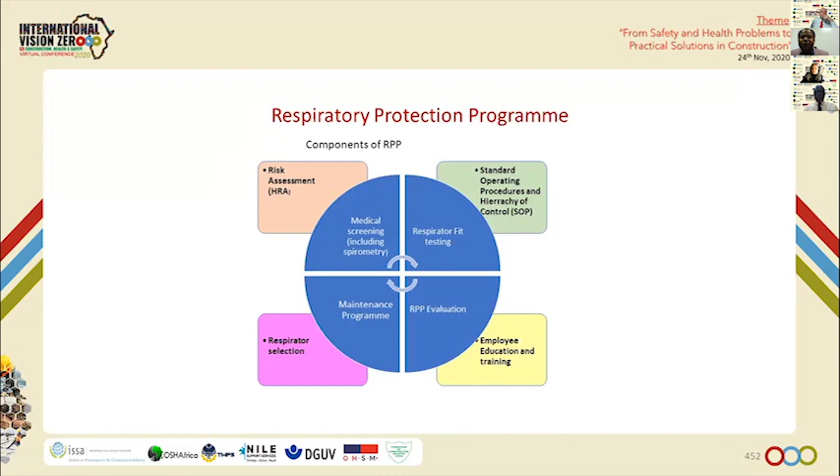Les programmes de respiration sont clés dans le combat contre les silicates. Les procédures standards comme l'hiérarchie et l'éducation des employés, le sondage médical, le programme de maintenance, aussi l'évaluation de votre programme. Cela est très important. La prévention de l'intervention des silicates se met en place avec l'exposition, les actions correctives.

L'utilisation et à éviter le balayage à sec. Ainsi, une surveillance robuste, les sports, l'exercice et la conscientisation au lieu de travail, et l'évaluation aussi, cela est très important.

À qui est-ce qu'on doit inclure? Les gens qui font ces activités à haut risque des silicates. Même si vous pensez que vous n'avez pas le haut risque, vous devez inclure tous ces gens dans la surveillance. Chaque fois que vous avez les équipements, le besoin des équipements de protection dans des paramètres, tout cela est indiqué.

Les composants de surveillance de respiration, les questionnaires, et puis un suivi, les spiromètres, l'examen de poitrine, l'examen thoracique. Et chaque 3 ans, dans les 15 ans, avoir la surveillance, aussi le style de vie, éviter les cigarettes ou fumer.

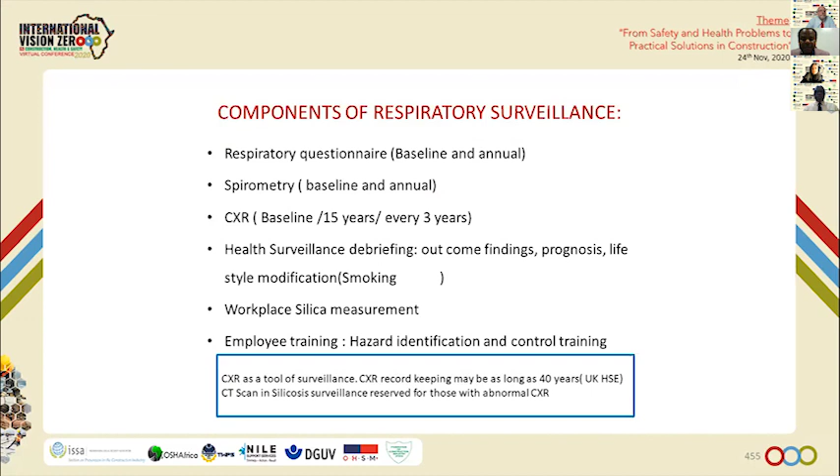La formation des employés est très importante. Et l'examen de thorax doit commencer à 15 ans à cause de la latence de la silice. Cela est très important. Les critères, les gens qui sont asymptomatiques dans la surveillance.

Et la surveillance, la décision des exercices ou de la gymnastique, c'est très important. Impliquer les médecins. Et les résultats possibles en prenant les décisions en matière de silicose. Et retourner dans la réduction des expositions, les contrôles ou l'élimination, ce seraient vos décisions en termes d'intervention que vous devez faire pour éliminer la silicose.

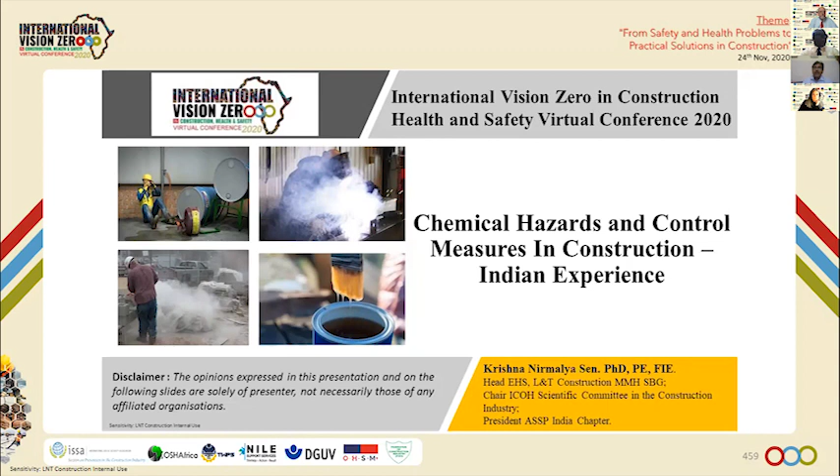Before I take you there, I would like to give you a broad picture of the Indian construction scenario. We have around 54 million people — of course the data is a little older, so maybe a bit more by now. But a large number are in the unskilled category, and a huge number of companies are small in nature. This creates a lot of challenge in terms of control measures, particularly for chemicals, because there are other challenging issues too, including fall from height, material handling, civil excavations, etc. Another problem is the skill level and the number of engineers at the site. So this is in general.

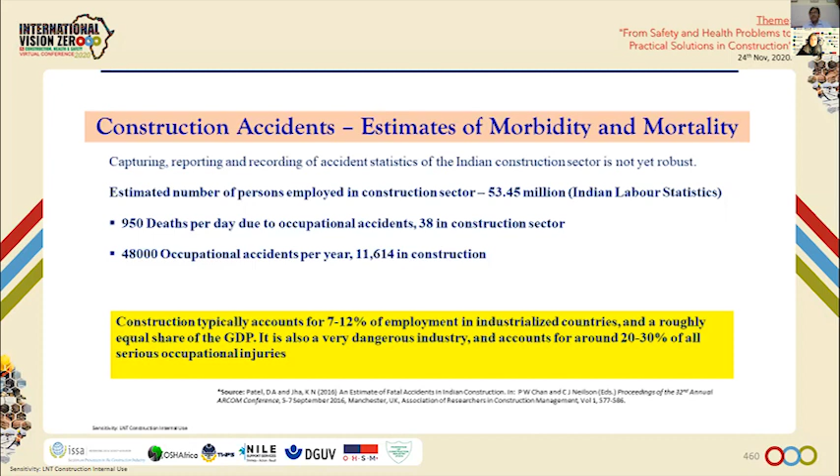If I look at accident data — because health data is not really available much, the country is going through a digitalization process through which epidemiological data perhaps will be available — I am not able to give construction-related health data, but there are fatalities which are recorded, and this, if not very reliable, can still be considered. You can see a large number of people are actually dying in the construction sector, which is reported. So that is a big spectrum.

If we look at chemicals in various processes, I will not detail each one because of time constraints. But every construction activity perhaps has some chemical interface — from piling, excavation, depending on where we are working, it will require bitumen, diesel exhaust emissions, waterproofing activities, surface hardening, concreting, floor epoxy, repair and dismantling, repair and rehabilitation. Silica, as we just heard. So there is huge chemical exposure in each of these activities. But unfortunately, this occupational health aspect in construction is not as heeded as the safety challenges. So this remains a big area of concern.

I will just share two or three small case studies which are very common. One case study, which is pretty recent, came to my notice — mixing up a look-alike bottle of water with one keeping a chemical. In this case, it was a thinner that looked like water. Though there was a label, the label was in English, and not all the workers read English, particularly when the person is thirsty — he doesn't really look at the label, he just looks at the bottle. And if the bottle is look-alike, there is a chance of misunderstanding and drinking it.

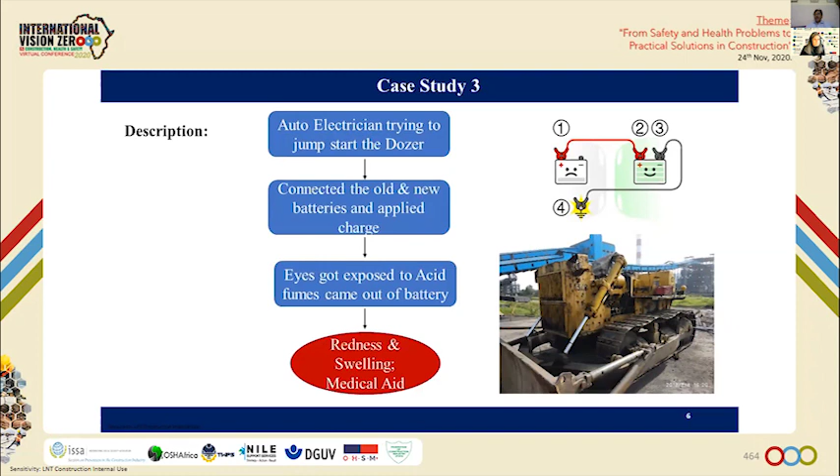Using used containers for keeping things which are eatable, or drinking water, things like that. So I'm not going further, but there are examples of various chemical exposures.

Now if I come to the practical part of this, you have primarily the physical hazards because of compressed gases, flammable liquids, oxidizers, etc. As well as from the health point of view, some of these are carcinogenic, highly toxic, corrosive, and irritants.

This is the challenge. Now as we go through the control measures, the primary consideration is elimination and substitution, as mentioned by a couple of earlier speakers. Since elimination and substitution is the best option, in some cases it is possible, and in other cases we have to focus on other options like engineering control, administrative control, and personal protective equipment.

So in chemical hazards, possibly the first two layers of control measures are the most important.

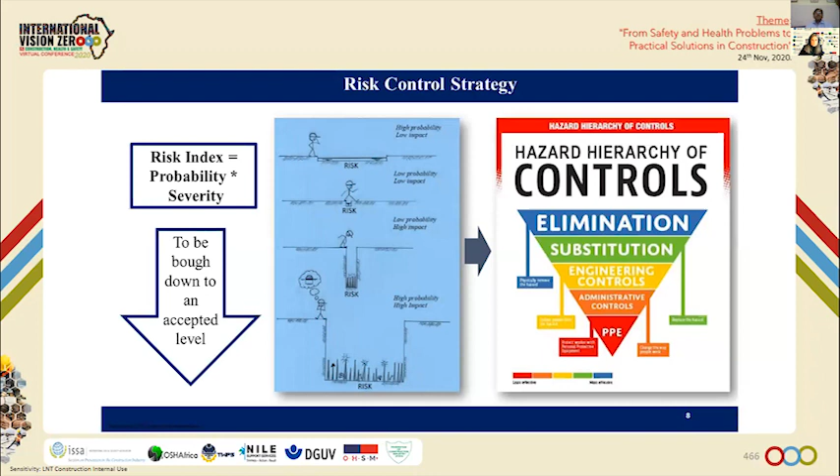If I come to some of the very commonly used chemicals and the control measures, we have cement and lime, silica, and there is huge exposure because of the lack of knowledge in the way people are using them. That means the application method and awareness of it.

There are admixtures which are basically irritants, with high pH value. Polyurethane causes skin and eye irritation, and also bitumen, which is hugely used in road projects, etc.

Though elimination and substitution have limited application in some of these cases, other options like engineering control, having proper containers, having separate storage which we are trying to do, and also administrative control like permits, training, a high level of supervision, and last but not least, providing coveralls and suitable equipment and instruments.

Construction also has a large amount of hot work for various processes, particularly welding and cutting, where fumes are generated because of coatings and chemicals, and also metals getting exposed to heat. So metal fume fever because of exposure to welding fume, lead poisoning, and lung diseases, including dermatitis. And of course there are other gases like carbon monoxide, fluorides, NOx, and O3.

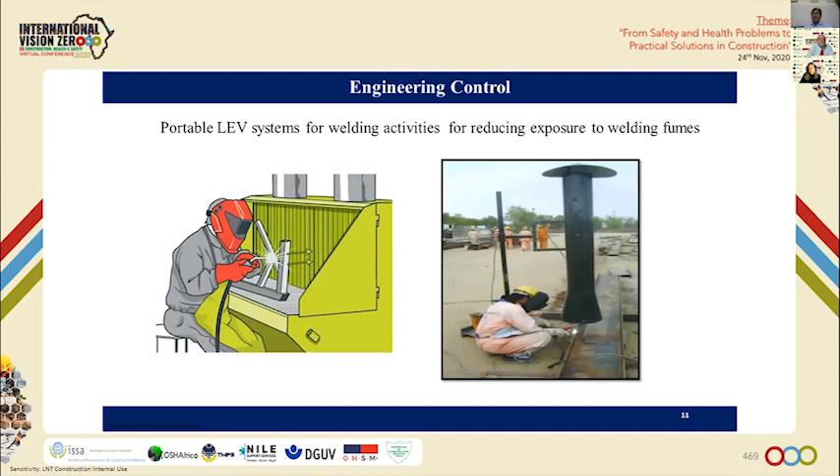Painting is a major activity, and some painting is done in open areas, but there is also epoxy painting done inside tanks and big pipelines. People are exposed because of painting, and there is also continuous painting of various structures done inside a painting machine. But still, people handling these paints have huge exposure, and there are serious health hazards listed here, like toxicity to the nervous system and things like that.

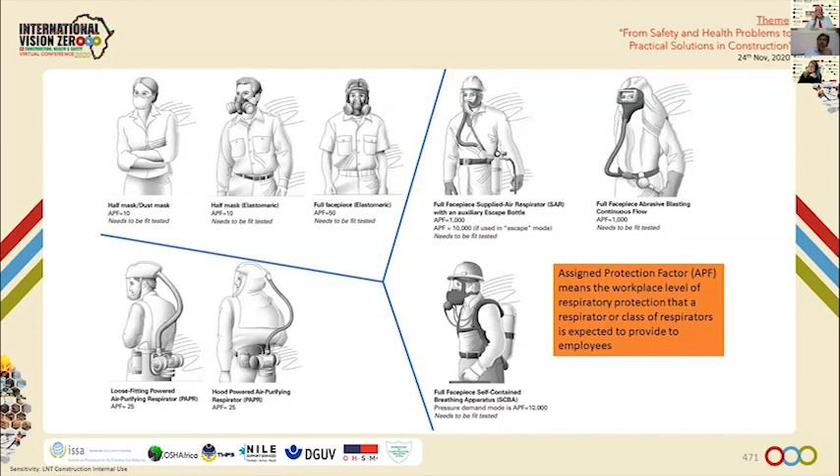So I was just mentioning about the personal protective equipment and importance of the same in light of the limited protection or limited possibility of having alternative control measures. Coming to the fiber, we have heard the discussions on asbestosis and the usage of asbestos. Asbestos is not yet banned here.

There are companies bringing alternate material like cement fibers with alternate material, but it is still a struggle to stop the usage of asbestos. As an organization, we are not using any asbestos, but as a country we have not yet stopped the usage of asbestos, because some people think they are using it in a different way, and the alternative material is a little bit costly, around 20% to 30%. So our effort would be now to stop the usage as much as possible in the country.

Although as a company we have been able to convince the management and stop the usage of the deadly fiber.

Now coming to DGs and nitrogen, because nitrogen is hugely used particularly in the oil and gas sector for purging and doing maintenance work, repair work, connection, uptake, etc. So many times it happens that after the nitrogen purging is done, before allowing people in, they do not check the total adequacy of the air, oxygen quality in the air.

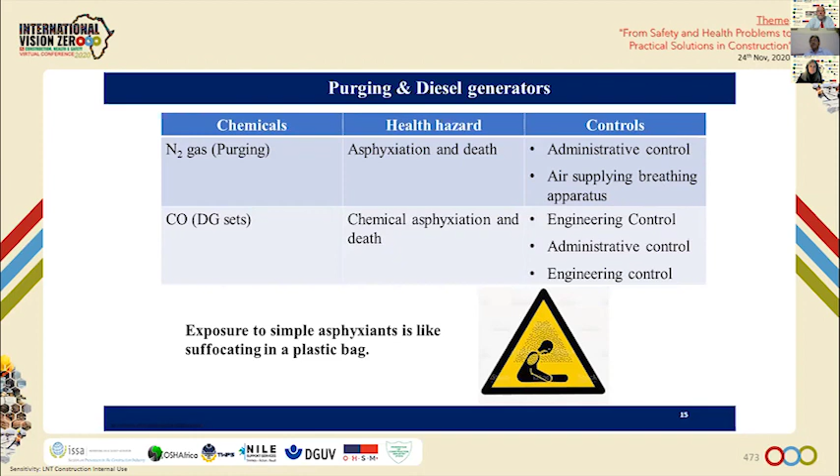And of course, DG sets, particularly in tunnels and hydroelectric projects as well as road tunnels - it is important to have proper ventilation through engineering control and, of course, administrative control.

Exhaust being taken out. Going to the carpentry workshop where formwork material is being prepared for civil activities. There are alternative materials coming, but wood is still very highly used in construction, though aluminum formwork and other formworks are becoming popular, and they are pretty lightweight and very sturdy, but there is a difference in the cost.

And this wood dust has its own hazard in terms of exposure, and also long-time exposure, because some people working in the making activity are using it for various processing in the carpentry shop. So they are continuously exposed.

Of course, there are solvents and paints, as I mentioned earlier. And transport machineries, which I just discussed, the various hazardous chemicals emanated during exhaust have their own harmful effect. It is very important to think of substitution - not having the machinery operated by diesel, but operated by electric or pneumatic machines. That is how substitution could be helpful. It is being done in some places, but not fully implemented.

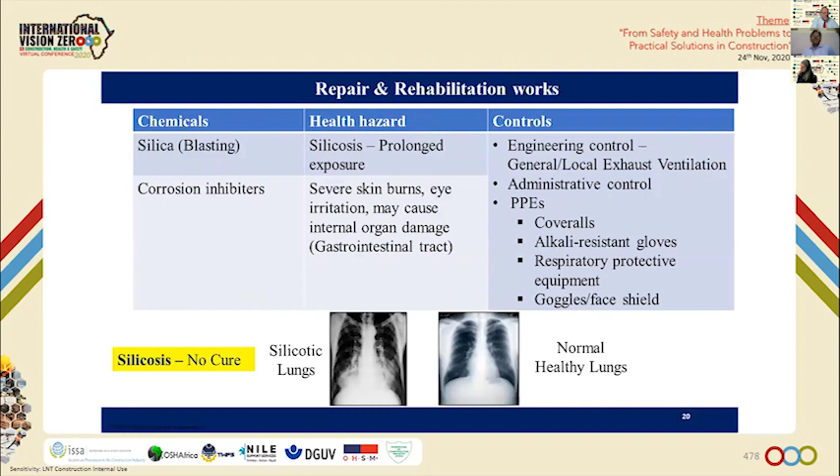And so I'll go a little faster in the interest of time. Silica has been discussed. So the most important thing is elimination - lead, H2SO4, and of course pest control. The focus has to remain on prevention and the leadership commitment which comes from the countries.

There is a recent change in legislation on safety laws. Several safety legislations have been updated, and as early as last month it has just come. So focus would be on the country's leadership as well as the leadership of organizations, and identification of hazards, and training and involvement of people in the construction sector is very important, because a large number of people come, and around 82% are not very knowledgeable in terms of the risks and hazards and the skill they have. So we have to continue to focus on prevention and apply the Vision Zero principles as we move forward.

With this, I thank you all for your attention, and thank you for this opportunity.